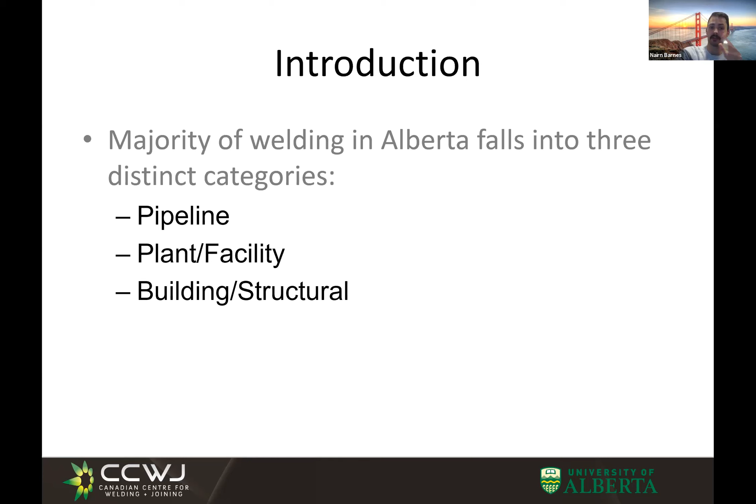And then finally, at the end, we have a work-through example where we're actually going to work through and build a welding procedure. I have a sample welding procedure to give to you guys at the end so you'll be able to see how we actually applied the code in order to build that.

So the technical definition of a standard is essentially technical definitions and guidelines that allow everybody involved in the project or the production facility to carry out their tasks, right? Whether it's welders, inspectors, operators, anything like that—that's what a standard details, all of those guidelines. Now, the difference between a standard and a code is wishy-washy.

This is one of the definitions, but essentially a code is a standard that has been adopted by a government body and is therefore enforceable by law. Most of the ones you'll see today are enforceable by law. If you're adopting that standard and having that certification, people can come after you and say, hey, were you following this properly? So that's pretty much the difference.

But the larger difference I want to highlight today is between standards and specifications. Specifications are something you will surely encounter, particularly in Alberta, if you end up working anywhere near the oil sands or touching it remotely—specifications are above and beyond standards. Essentially, they're made by companies or sometimes by overall industries, by private interest groups, where there are additional considerations above and beyond the level of the standard.

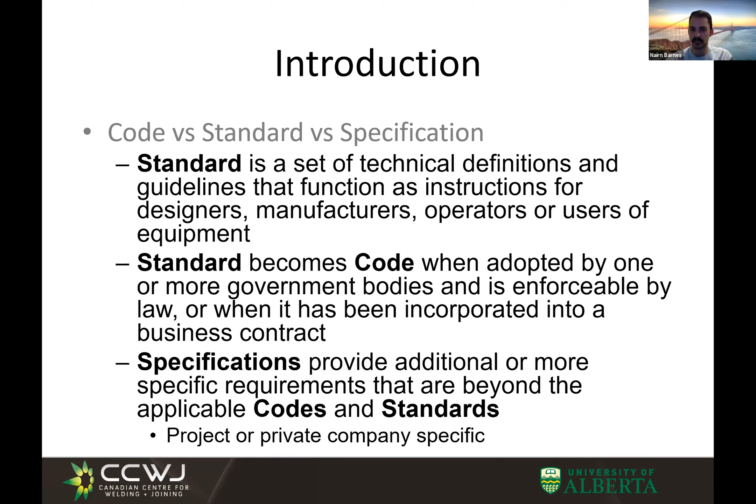All of these things serve to give clients a sense of accountability for their end user, for the person doing the fabrication. It's essentially a quality standard that they can hold you to. So if you are given a project with a specification and a standard listed for it, this is an agreed upon thing between both parties that says, this is exactly what you've agreed to do and how you've agreed to fabricate it. It holds you to a certain quality standard and ensures that you have the proper certifications in place to be qualified for that code in the first place.

Throughout all these different industries, there are different governing bodies you'll hear bandied about—governing bodies like ASME, or in Alberta, ABSA or CWB, AWS. All of these are different governing bodies, but they have a very wide range of involvement, and that range of involvement really changes the way you approach the application of those different codes. In certain codes, you'll have people that are overly involved, or at least that's the prevailing opinion. People complain about them and say, oh, all these bureaucrats are slowing everything down—we have to get this approval and this approval.

There's a good and bad side to all these situations. If you have all those governing bodies being really hands-on and involved in the process, yes it can slow things down, but it also provides that level of protection. When you're an engineer producing things to a code or standard and you don't have that governing body giving you that extra set of eyes confirming you've done things right, that onus is all on you. So there's a lot of liability and risk carried when governing bodies aren't very involved. It's something to consider as you move forward through your careers, a very real possibility.

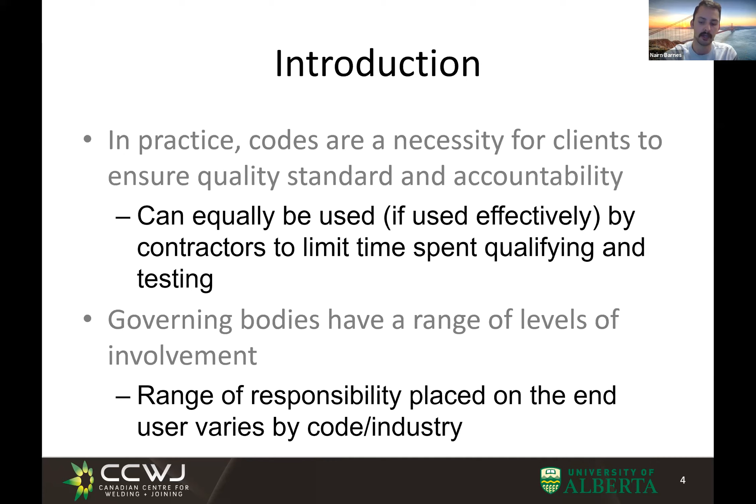Now we're going to break down some of the relevant codes for each of the different sectors, give them to you without going into too much detail, and then we'll start breaking down the individual sectors one by one. The first one is pipelines.

Z662 is the one you'll hear all the time in Alberta. I guarantee if you end up working in pipelines, you'll see every single specification that's ever been made thrown at you as well, but Z662 is your baseline. This is mandated across all of Canada. If you're going to build a pipeline that fits under their criteria, you have to follow that, and it's mandated by the National Energy Board. This was done during the Pipeline Act, and essentially they said this is a mandatory thing you must follow, you must carry this certification and meet the requirements of Z662.

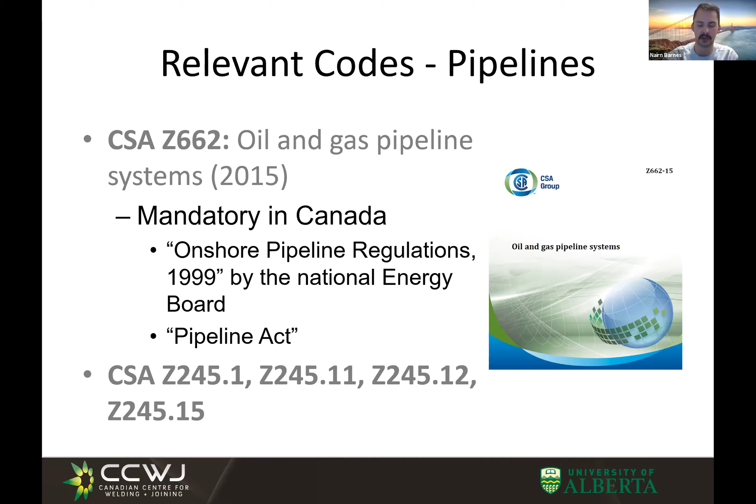That's all pipelines across the board in Canada. The ones listed at the bottom are additional ones you'll run into. The first one, I believe, covers seamless pipe, the next one is fittings, then flanges, and then valves - I'm not 100% sure on those, but that's what those codes correspond to. I'm not a pipeline engineer, but I believe that's right. Those give additional information about those specific areas and how you'd apply those things beyond the requirements of Z662, and you'll see that trend continue throughout the rest of the industries here.

When you go into plants and facilities, CSA B51 is the overarching one that provides the safety considerations behind it, but that's not the one you'll hear as much or as relevant when talking about plant and facility codes. Really, the ones you'll hear in Alberta are ASME Section 9, and I'm sure if you're having an ASME code expert talk, the next slide is going to look all too familiar after Thursday's lecture.

The other ones listed go above and beyond what the main ASME code says, like ASME B31.1 and B31.3, which are talked about quite a bit in terms of going more specific for pressure piping. A quick note: pressure piping and pipelines are not the same thing, even though pipelines do operate under pressure, otherwise they'd be very ineffective at their jobs. They're not the same as pressure piping, and those definitions are given within these codes.

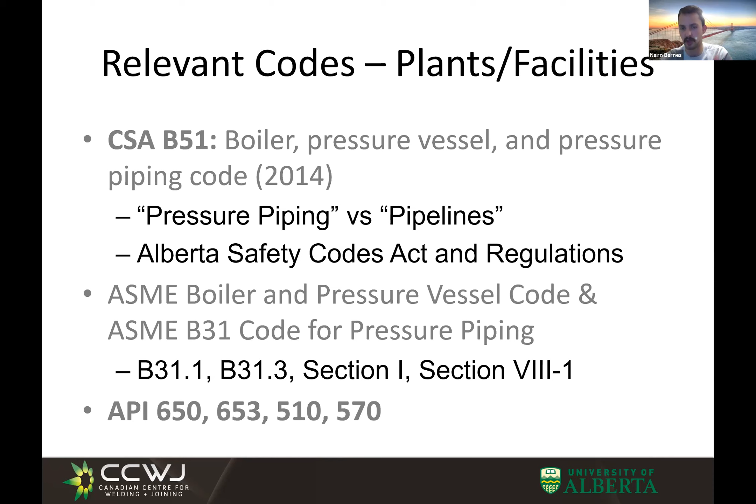At the bottom I've listed some API codes. API is the American Petroleum Institute, and those codes list - I believe the first is for pressure vessels, but the other three are for inspectors and inspection qualifications for pressure vessels. Those are relevant ones you'll probably hear when you go into industry. As for ASME codes, there are a lot of them out there. The one we'll focus on almost entirely when we talk about plants and facilities is ASME Section 9 - you'll hear that thrown around a lot within pressure vessel talk, as it covers all the welding considerations for pressure vessels.

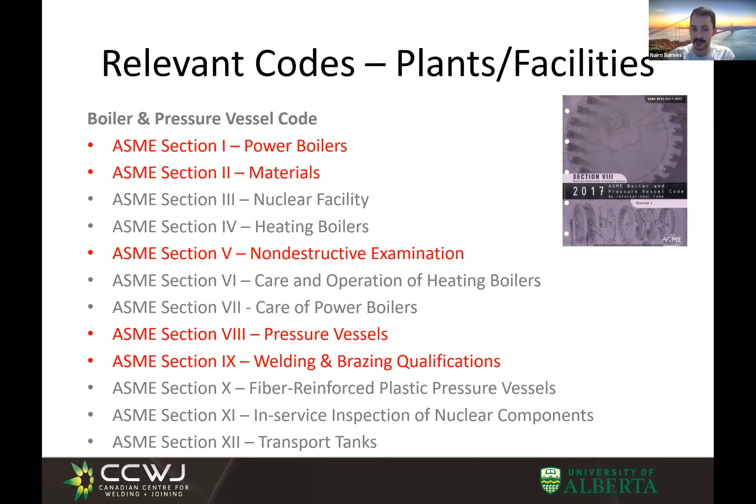So whether it be certification of welding personnel, or it's the actual qualification of your welding procedures, that's the one that's going to be relevant.

And then again, like I mentioned, you have B31.1 and B31.3 for power piping versus process piping. Those definitions are very clearly given on how those are distinguished between the two. I don't work in that industry, so I'm not ultra familiar with what the actual difference is, apologies for that.

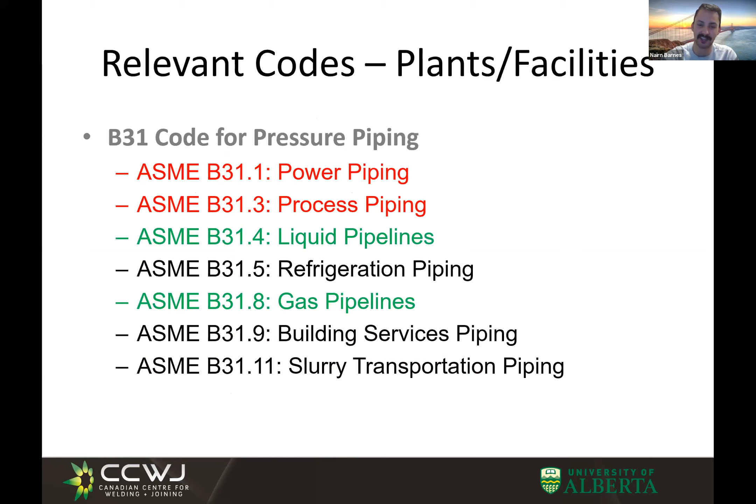And then finally, the one that I am very familiar with is the structural industry. Within Canada, we live in this nice little limbo state where, like all things, we end up with a Canadian version of things, and then we also have to abide by the American version of things as well.

But the ones you'll hear talked about, and we'll go into a lot more detail when we talk about structural specifically, are W47.1 and W59, which are both administered by the Canadian Welding Bureau, a term you'll hear a lot if you stay involved in welding. Those are both CSA, Canadian Standards Association codes.

And then the other ones relevant here are S16, which is design of steel structures. So if you're building a building anywhere in Canada, that has all the design and limit states you need to consider, much more in a structural engineering vein than a materials or welding side. And then there's the S6 code, which is the bridge code for bridge design.

Now, I mentioned that we also sometimes have to abide by the American code. So AWS D1.1 lives there. AWS D1.1 is essentially equivalent to W47.1 plus W59.

W47.1 covers the certification aspects of your company - how you get your welder certified, your welding engineer certified, your welding supervisors, your actual company certified. Whereas W59 covers the application. All of that is covered in one code in D1.1.

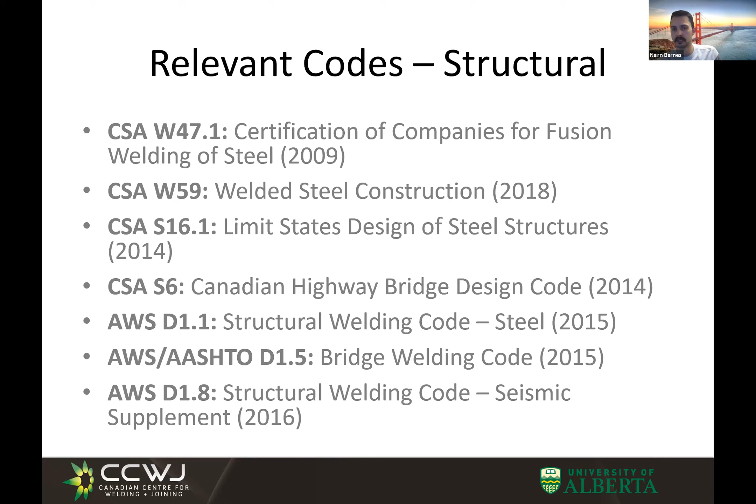Oh right, I have some definitions first. Good for me for knowing my presentation.

Weld procedure specifications - this is a term I'm going to throw out a lot within this presentation, shortened to WPS. Essentially, a WPS is your recipe book. So when you go to do a weld procedure, it has to be written down somewhere so that people know what to do.

That piece of paper, that recipe that has all the welding parameters, what process you're using, what base materials it's good for, what filler material you're using, everything like that is going to be written on a single sheet, or a couple sheets of paper. And that is your weld procedure. This is the recipe you can hand to the welder on the floor, and he can go and make that weld.

That definition is pretty true throughout all of the codes. There's some variation, unfortunately, because people love acronyms in engineering. WPS does mean the same thing for structural, but isn't actually called the same thing. So you might hear me slip in a D and say WPDS. That's because within the structural industry, we have welding procedure data sheets, which are that recipe. WPS actually means something different, just to be extra confusing. You'll see throughout this presentation that there's a lot of things with the exact same terminology that mean a completely different thing if you're in a different industry or referencing a different code.

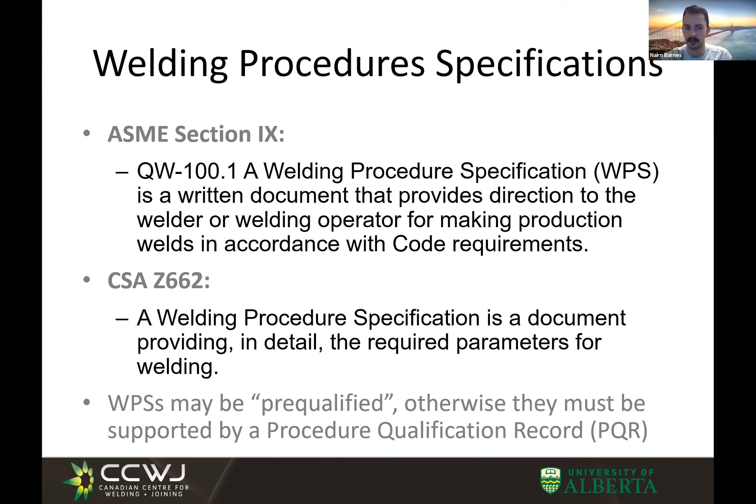If that doesn't apply, which it very often doesn't, particularly in Alberta, you need to support your welding procedure or certify it through what's called a procedure qualification record, or PQR. I know, more acronyms. A PQR essentially serves as the testing that proves out your welding procedure. The requirements of testing for a given welding procedure are also listed within the code, and we'll go through that within the example we'll run through today. Essentially, PQRs support non-pre-qualified welding procedures, which then can be passed along to the floor.

The next step in the process is determining the range of your weld procedure. You need to figure out what you want your welding procedure to do. Take the instance of building a pipeline: is it only going to be good for 36-inch pipe, or good for 36 and 24-inch pipe? Is it going to be an automated welding procedure? Is it going to be done with MIG? Is it going to be done with stick? All those different things need to be determined. You need to figure out exactly what you want your welding procedure to do.

This is a big consideration we'll talk about more as we go: do you want your welding procedure to be future-proofed? Do you want it built in such a way that you don't have to go back and requalify it a million times to get a bunch of different welding procedures? You want to hit what I'd like to call the Goldilocks zone, where you don't want a welding procedure so specific that in order to do a job you need 40 welding procedures, when 5 welding procedures with a sufficient range would do.

You also don't want to open up the welding procedure range so massively that if you hand it to a guy on the floor, he has so much freedom and flexibility that he doesn't really know what he's doing, and he's going to actually cause damage by not being given that specificity. So you have to balance both those factors.

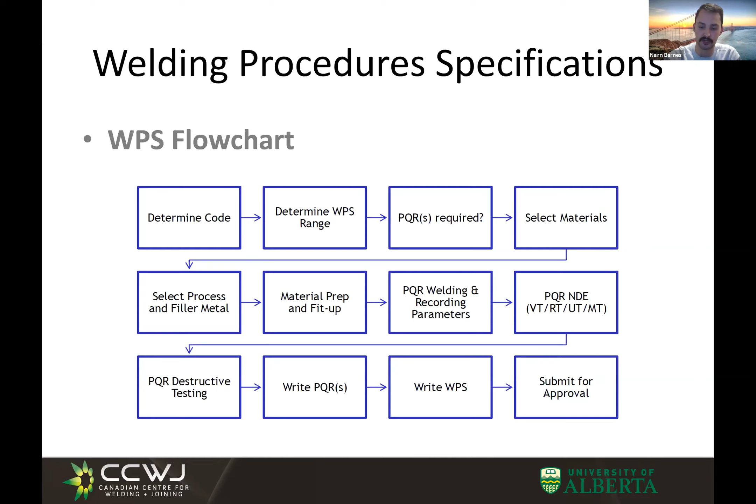All right, so first up, we're going to jump into pipeline welding procedures. And yes, that is a good note - I saw that in the chat. He or she is a very good note. Pardon my generalization there.

When we talk pipeline welding procedures, essentially that's covered off in Z662. Now, this is one of these instances where there is no pre-qualified welding procedures. For pipelines, you have to do a PQR every single time.

Now, granted, you can do a PQR and create a welding procedure that may be good for future projects, which is where we want to build that future proofing - but not always. Certain companies will just require you to build a PQR every single time you go to a new project. So you have to have that in the back of your mind - you're going into this knowing you're going to do testing.

Typically, these are not going to be reviewed by a governing body - in this case, the National Energy Board. They may audit it. If you're working for a huge pipeline, like when Enbridge builds pipelines, they're probably going to take a look and audit those welding procedures. Besides that, it's going to probably be reviewed by the contractor - that's your company - and by the owner, the client at the end of the day, be that a government client or a private client. It is going to be reviewed and subject to approval, but that means the onus really is being taken on by the engineer preparing that welding procedure throughout.

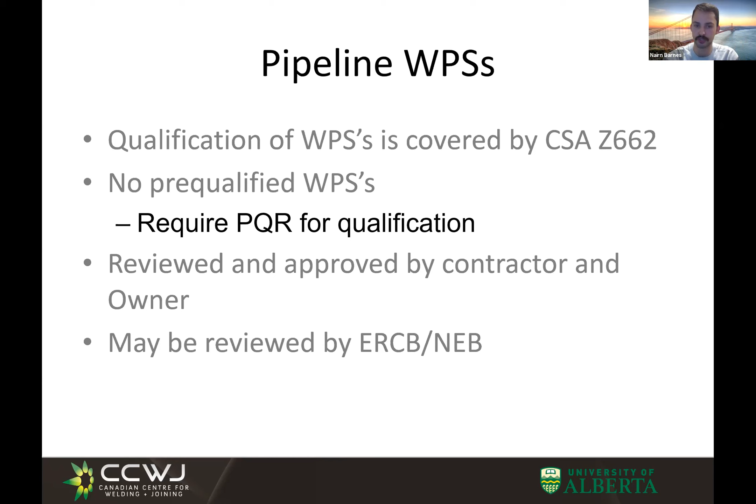So I'm going to chuck some of these things in here. Like I said, there's no need to memorize all these clauses - if you get into this industry, you're going to become more than familiar with these things. Materials for Z662 are shown in clause 5, specifically that table, and they cover the pipelines and all the components here. One of the things I wanted to highlight, one of these confusing things that has different definitions depending on the code, is notch toughness.

So notch toughness - we live in Alberta, and in the winter, particularly if you're welding or doing anything up north, the temperatures are very, very low. Typically the general temperature considered for active service is minus 45, and sometimes it goes as low as minus 60.

We're operating in a very cold weather climate, which means you need to make sure that whatever you're doing for welding is going to carry through and not fail when you put it into the field. I'm sure you guys, from what Patricia said, have gone through a bit of the NDE side and maybe testing, and if you're a materials engineer, you surely have heard of Charpy V-notch testing.

Maybe the MatEs too in MatE 202 - Charpy V-notch testing is essentially measuring the impact properties or the toughness of the steel. Unfortunately, notch toughness is the way we measure this throughout any welding code, but that notch toughness definition is completely different from one code to another. They're organized by categories, and you'll hear category language throughout the rest of the codes, but it doesn't necessarily apply because the categories are organized completely differently.

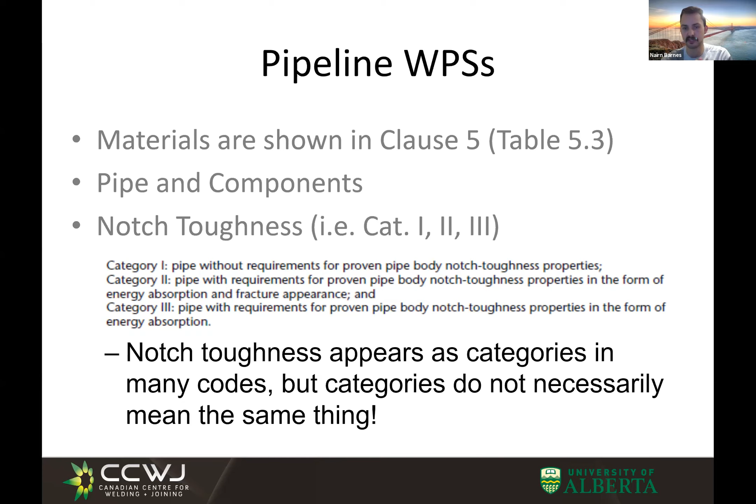Within the pipeline field, category 1 is something where you don't need to care about your impact properties. Category 2 is where you care about the impact properties, and not only that, when you do an impact test, you actually have to look at the fracture surfaces to see how that failure occurred - did it bust through and the crack propagated most of the way, or did the impact actually do most of the damage? They start to care about that in category 2. Category 3 is realistically what most of it will fall into if you're going to have notch toughness requirements, and they don't care about the fracture appearance - they care about how much energy it took to break that piece. But one thing to note about notch toughness and categories is it's completely different code to code.

In terms of the variables that go into building a welding procedure considered by Z662, they have that all contained in clause 7. This will be a very similar list of variables no matter what field you're in or what code you're referencing. So they're going to care about what welding process you've chosen, what the joint geometry is.

Is it a V? Is it a fillet weld? What does that joint geometry look like? They're going to care what the base material is, what you're using as a filler material, so fluxes would be counted into that for subarc. Shielding gas definitely matters, the position, direction of welding - is it vertical uphill or downhill, where direction really becomes relevant. It doesn't really become relevant in any other direction besides pipelines and vertical up, vertical down. Preheat and interpass they're going to care about, and then post-weld heat treat as well.

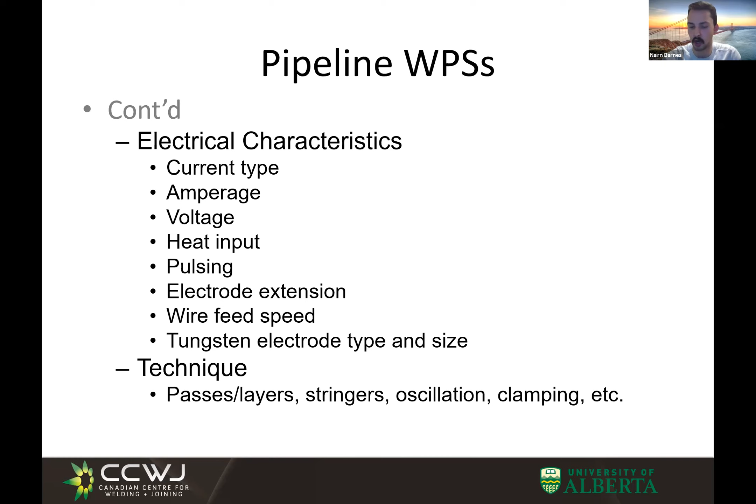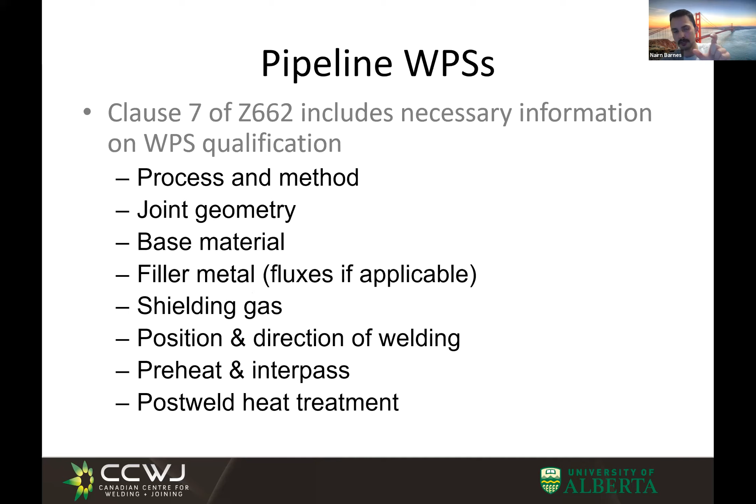Then the main welding parameters that you guys will have learned throughout the class - amperage, voltage, travel speed, stick out, all those different things will be included as well in terms of variables to be considered. And then there's also the technique - are you welding in a stringer bead? Stringer bead is just a single bead, you're not doing anything fancy, you're just running it straight across. Or are you putting in a weave, trying to build a bigger thing? How much is your layer size varying? All those things are considered in that technique. That's just a blast of all the different variables that go into building welding procedures. It's specific here to pipelines, but these same lists apply to all of the different industries.

Another term you're going to hear throughout all the codes is essential variables. For essential variables, what this means is all of these variables here - certain ones considered within there are considered essential, which means that if you change those variables outside of the given limits - and all the codes will state, and we'll see here in a second what those essential variables are - if you change your parameters, or want to change the parameters in your welding procedure outside of those given limits, you are going to have to perform a new PQR.

So what that essentially entails is you want to be very careful. When we're doing that sort of future-proofing and planning of our welding procedure and determining the range, the essential variables are really what you want to consider, because that's what's going to affect whether or not you need to do a new PQR. So if you change your amperage by 10 amps at the bottom end, nobody's probably going to care.

And it probably won't be listed on the essential variables. I mean, it could be for given codes, but it probably will not matter. But if you want to, instead of welding on 350W steel, you want to now weld on stainless steel, people are going to care. And they're going to require you to do a new PQR. So you want to future-proof it as best you can.

And certain times you can't get away from it. If you're changing base materials entirely, you're not going to build a weld procedure that's good for two completely different families of base material. But to the best of your ability, you should be planning with those essential variables.

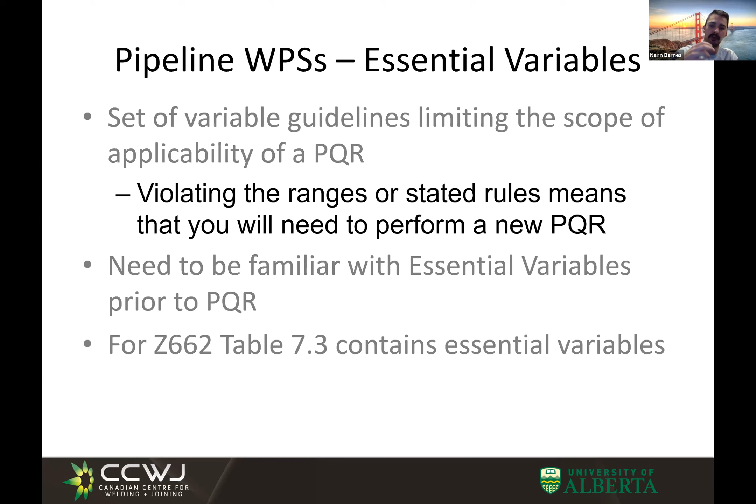So I've essentially straight copy pasted out of Z662 the table 7.3 that lists all of the essential variables. I'm not going to go through this at all. I'm just going to show it to you and have it as an example here. The essential variables are going to look different for all the different codes. But basically, the big takeaway I want to give here is that it's clearly defined what variables and parameters are subject to these limitations, and you need to become familiar with them.

So in the pipeline code, it's organized by the diameter, outer diameter of the pipe, as well as if you're using automated welding or not. Pardon me, I'm just going to take a drink.

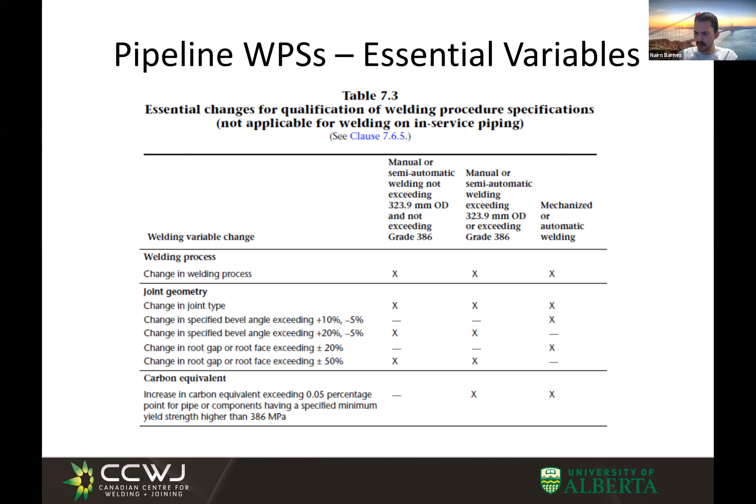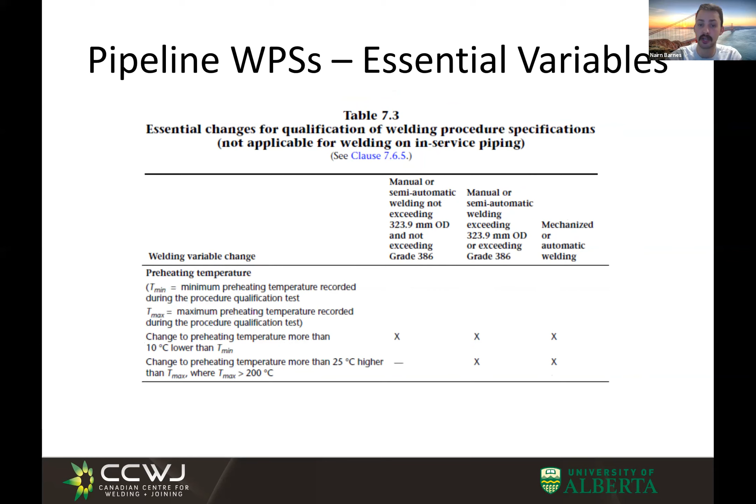And then the actual variable is shown on the left-hand side here. So I've put, like I said, the entire table in here. I'm not going to go through it. You can look through it on your own time if you're interested. But I just want to give you that framework or example to base that off of.

So the next thing I wanted to highlight out of this code is the PQR testing. One of the interesting things about pipelines is that the welding procedures are always subject to these PQRs, so you always have to do testing. Now, the nice thing is it's very clearly defined what kind of testing you have to do.

So what they have is, given the size of your pipe, they will tell you which tests you need to do. So all the tests are listed here, and then they'll tell you how many of those tests you need to do for each one. So for smaller pipes, you don't need to do as many structural tests, but the larger you get, the more they're going to expect that baseline standard to be there.

So not only are they going to tell you what tests you need to do, they're also going to tell you where you need to extract those samples from. So given your different size of pipe shown here, they're going to tell you exactly where to extract all of these different types of samples.

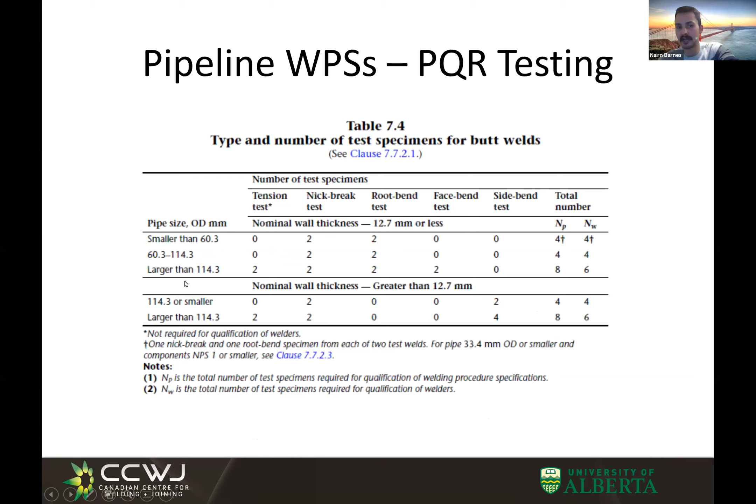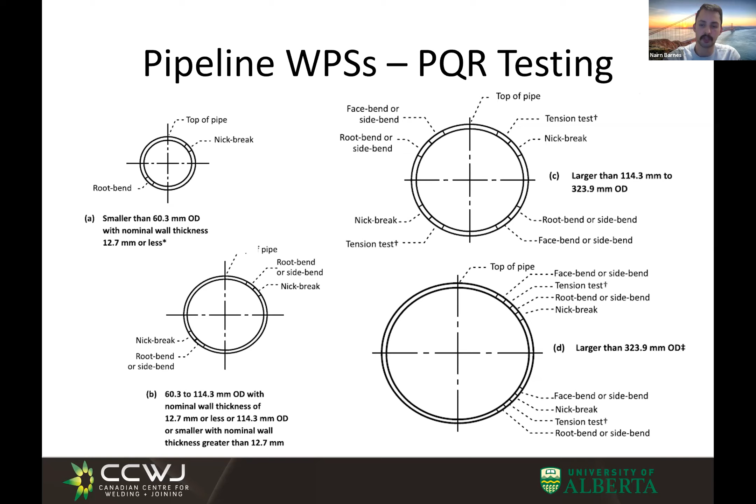So if you're doing this small size of pipe, this less than 60 mil outer diameter, you're going to have to extract nick break and root bend samples from these exact locations within your sample. So you need to have everything very well documented and prove to a client at the end of the day that you extracted those samples from where you said you were going to. So all of that is clearly defined in the code, but it shows you exactly what you need to do.

The types of tests themselves, I'm sure you guys will have seen some of these before. Tension testing is one of them that's listed. Tensile testing is exactly what you've seen and heard of, especially if I think all of you will have gone through MatE 202. If you haven't, feel free to flag me down and ask a question about it specifically.

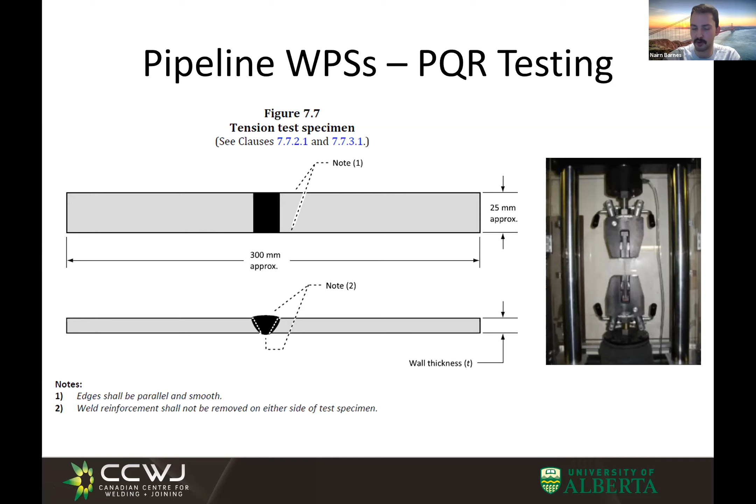But for tension testing, essentially, you're going to do your weld. Your weld should be situated for Z662 right in the middle of your plate. And then you're going to put it within the sample dimensions. You're going to put it into a tensile testing machine and pull it. Essentially, they care not only about the number, but they also want to look at that fracture surface and see where it failed. They're looking for failures within the heat affected zone, different places where that weld could have failed. And it can reveal a lot about the integrity of a weld based on where it failed. So tension testing is one that was mentioned.

Nick break testing is a very specific test to pipelines. You don't really see it too many other places. Essentially you prepare your sample, which is a rectangular prism with a weld in the middle of it, and then you're going to notch it on both sides.

You machine it down and notch it. These can be cut by a hacksaw, though there are other methods of cutting it. Then essentially you fracture it by applying a load, probably with a press. It doesn't have to be, but that's the easiest way to do this.

Really, what they care about for a nick break test is examining what that fracture surface looks like. Did the failure happen more to one side than the other? How much of that weld material is left over? Did it break somewhere else that wasn't in the weld? All of those things start to matter, and all of those parameters and acceptance criteria are clearly listed within the code.

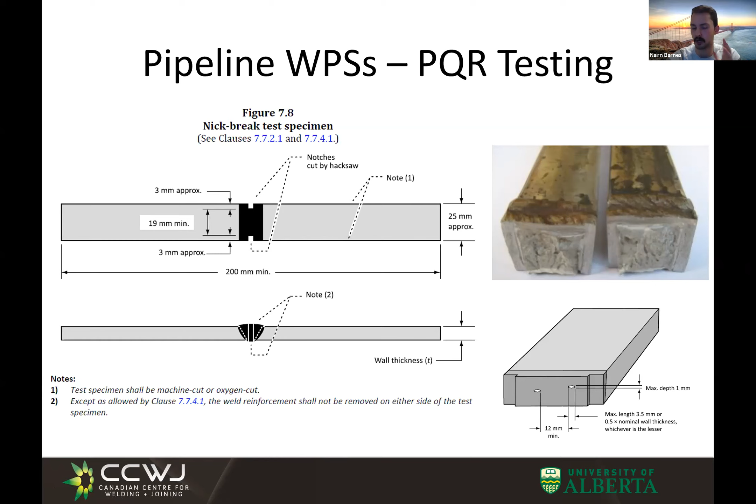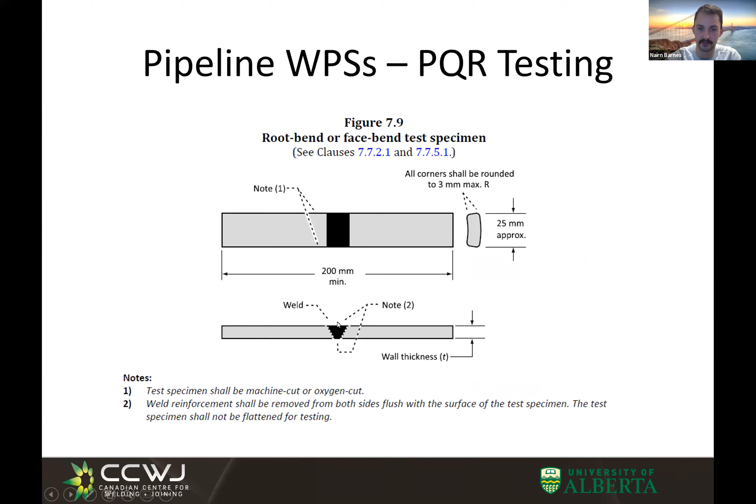What they want to see out of this is a couple of things. First, did that weld have the strength and ductility to allow the bend? Did it bend, or did it just break? If it breaks, you're going to fail the test.

But there's acceptance criteria. Very often within these tests, you'll see small micro cracks develop, especially in the heat affected zone or at the weld's root. Some of those cracks could be acceptable, and the acceptance criteria is all listed within the code, but some of them are going to be unacceptable. Or if you bend it and porosity starts to show up that you didn't see when the sample was just cut, all those things are what they're looking for to give it a pass-fail criteria.

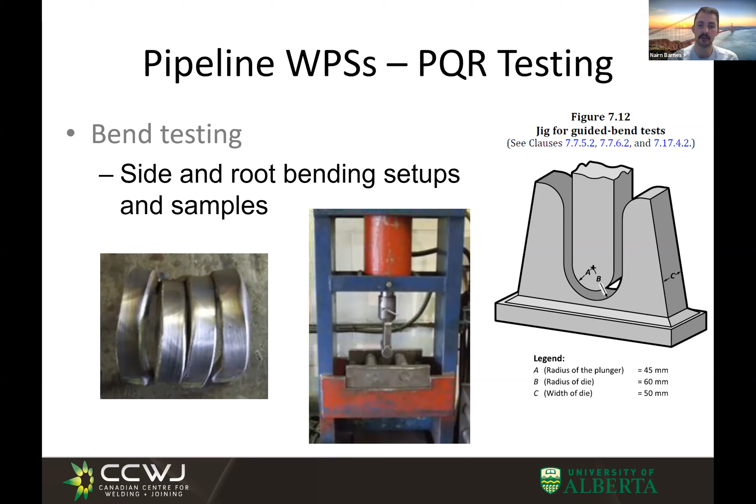You'll see these tests like side and root bends throughout all the codes. Like I said, nick break is a little bit specific to pipeline, but you'll see these types of tests throughout all of the different codes.

So that's kind of your drive-by view of pipeline weld procedures. I know it's quick, but that's the main highlights I wanted to pull. Of course, there's lessons to be learned throughout all of them, and there's commonalities to be learned throughout all of them. Hopefully, if you have any questions, just chuck them in the chat and I'll try to answer them as best I can. But really, this is going to be very drive-by.

Plant and facility welding procedures - like I said, you're going to get much more information about this, so I'm not going to go into too much detail in this area. Mainly what we're going to focus on is ASME Section 9. ASME Section 9 covers the qualification for all the welding procedures, welders themselves and the operators, and all those different aspects of it. Then there's sometimes additional requirements that creep in from these other ASME codes.

In this particular industry, there are pre-qualified welding procedures, but from my experience and interacting with people within the field, it's really not a reality that you can apply pre-qualified welding procedures. For the most part, you're looking at doing PQRs.

This is one of these very unique things in Alberta, where there's one of these governing bodies that gets a lot of flack. When you go to submit these welding procedures, you not only have to get the approval from the owner or the client, but you also need to get it from ABSA - this is the Alberta Boilers Safety Association.

Essentially, their job as a governing body is to ensure that you are adhering to the code very strictly. There's good and bad aspects to this relationship, but ABSA in particular is very well known for being very hands-on and very involved in the process.

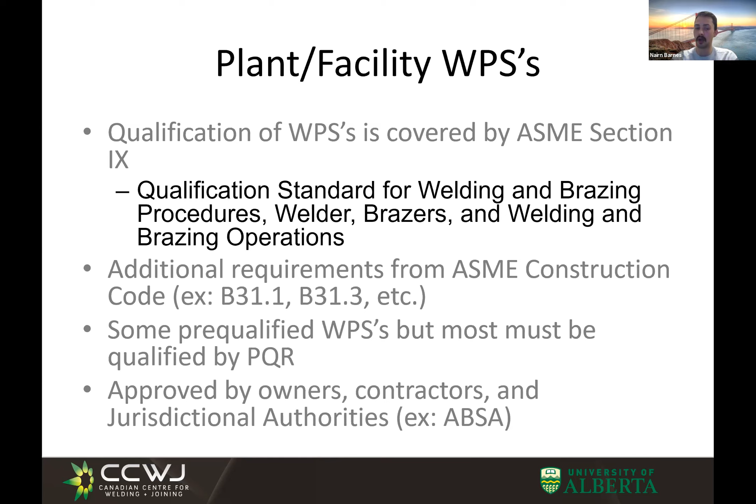But yeah, if you work within this field, you'll definitely hear about ABSA.

The part in particular of ASME Section 9 that we're going to look at is QW, or welding. There are 5 articles within it, so 5 different sections. You'll see that the ASME code, if you ever flip through it for casual reading - I'm guessing not, but if you end up working in the field - is written a little differently than some of the other codes. It's very self-referential.

As you go through the code, you'll see a lot of 'okay, see this clause, now see this clause.' It's one of those codes where you do a lot of bouncing around, and that's true of all codes in general, but ASME Section 9 in particular is very sticky about those types of things.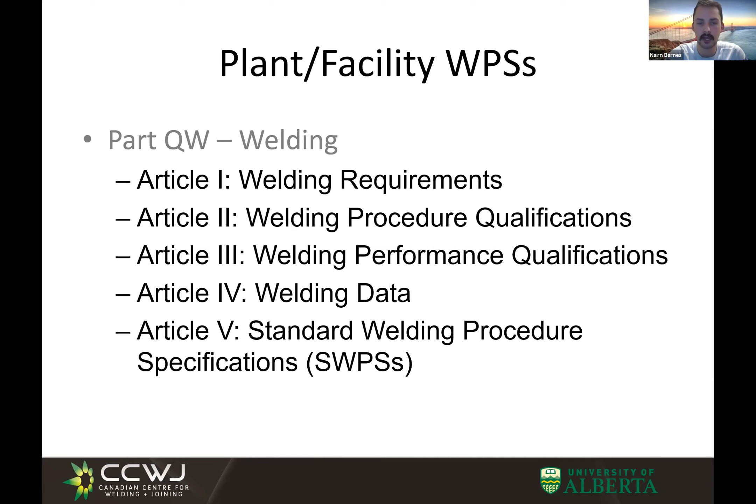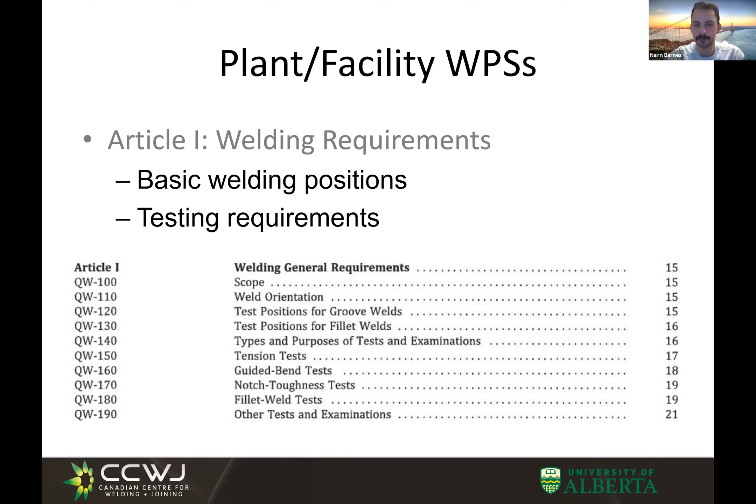So we have the 5 different articles here we're going to run through. The first one is the welding requirements, more general requirements. It's going to give you information about the basic welding positions, some basic testing requirements, nothing too insane. This is just your general introduction within Article 1.

Article 2 is where we get into actual weld procedure qualification. In this section, they list all of your essential variables, something they call supplementary essential variables - which we'll get into, another confusing thing - and then non-essential variables, which is anything that doesn't fall into those first 2 categories. One of the other things unique to this code is they talk about tempered bead welding.

Essentially using the current pass to affect the metallurgical constitution of previous passes. So you can affect the properties of the previous passes by welding over it again and subjecting it to another heat cycle. Typically it's done to give hard phases a little more ductility or provide a different level of toughness. It's very well explained, but it's pretty much one of the only codes that actually talks about temper bead welding.

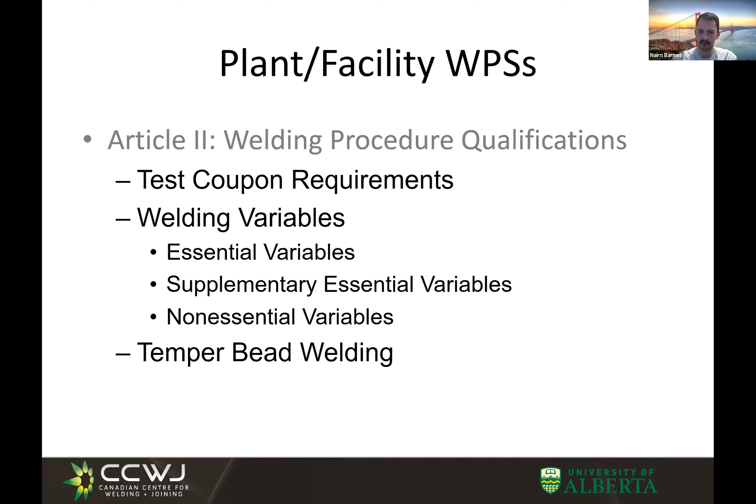In other codes, it's maybe referred to, but there's no explanation given towards it. So essential variables here are much the same as what we saw in the pipeline code. They're very clearly listed, but they have this new term they throw in called supplementary essential variables. Essentially the only supplementary essential variable is this notch toughness requirement.

So for low temperature, they require you to have a CVN, a sharp V-notch test that's passed? I don't know why they call it supplementary essential variables and not just notch toughness requirement. Seems confusing to me, or they could just include it within the essential variables, but it's all in there. And then they also list the non-essential variables as well.

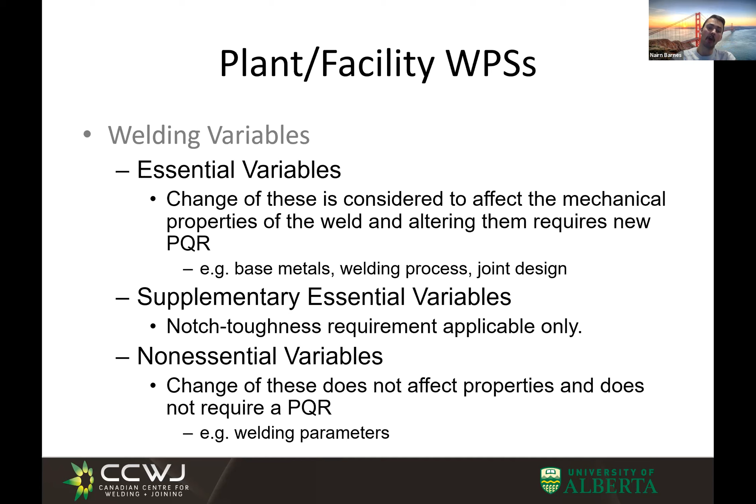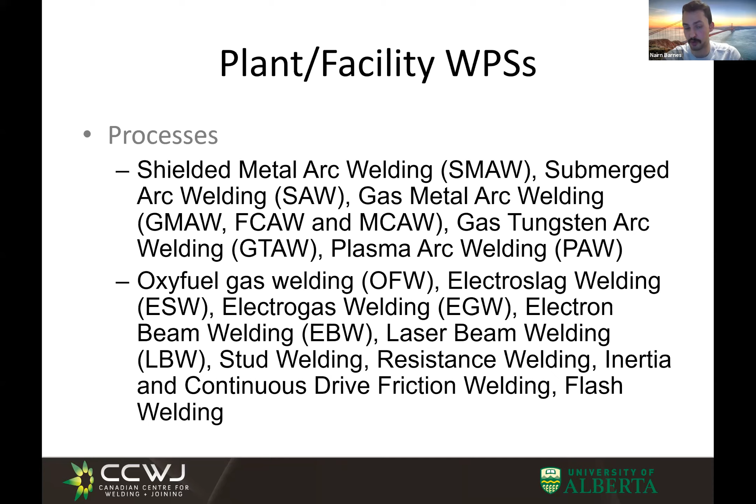In that section as well - and this highlights one of the interesting things about ASME Section 9 - is they list all the applicable welding processes, and if you look at this list, you'd be hard pressed to find a welding process that isn't listed here. There's a couple missing, but it's pretty all inclusive. The reason they do that is to cover all their bases, to make sure nobody can surprise them as they go through. There's good coverage of pretty much any single welding process, where other codes are not this widespread.

Welding performance qualifications are within there. This has the information regarding welder and welding operator qualification, tells you essentially what kind of testing is required to get them their initial qualification, how often they need to do retests, how long is their certification good for. All those aspects will be covered within that, as well as the coupons.

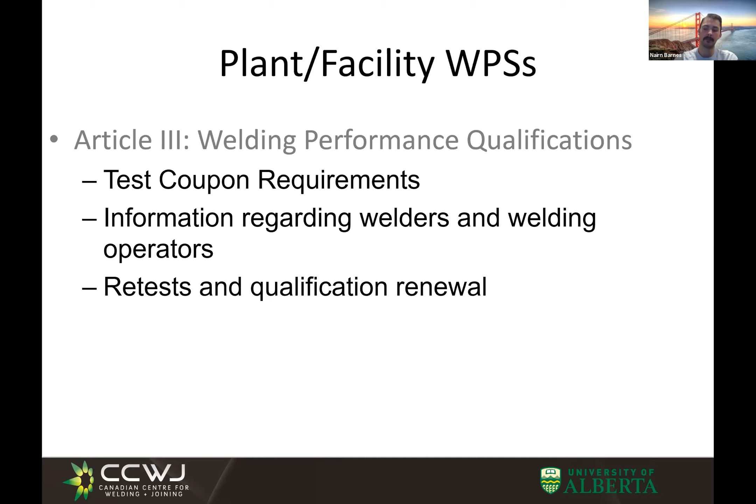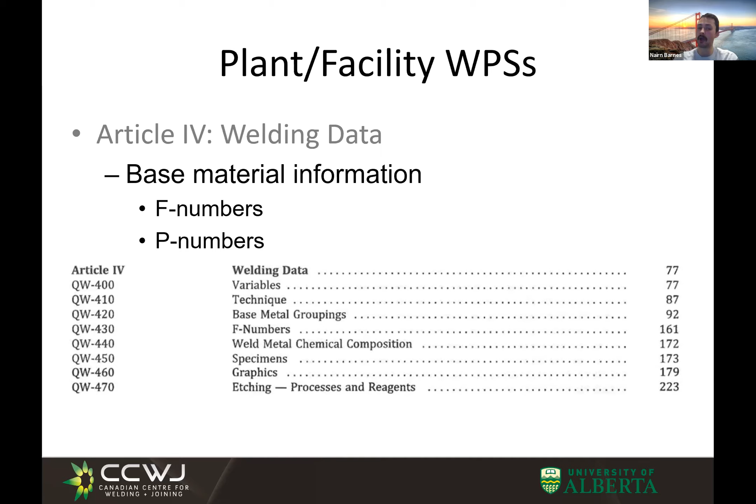Then next one up is welding data, and this is one of the important ones. This contains information about base material as well as filler material. And you'll hear these two things thrown out, F numbers and P numbers.

I've included links to them here where they have websites that are just the F and P numbers. P numbers are essentially all of the base materials that you can use within ASME Section 9 given a P number. So whether it's ferrous steels or nickel containing steels or manganese containing steels, whatever it is, that's going to have a separate P number. That's all listed on that website.

It's what was the base material chosen for the test, and what does that mean it's good for. So you want to be smart about this. You want to choose a base material that at the end of the day will allow you to build in the most flexibility moving forward. You want a base material that's going to give you the largest range, or maybe not the largest range, but the most useful range to you.

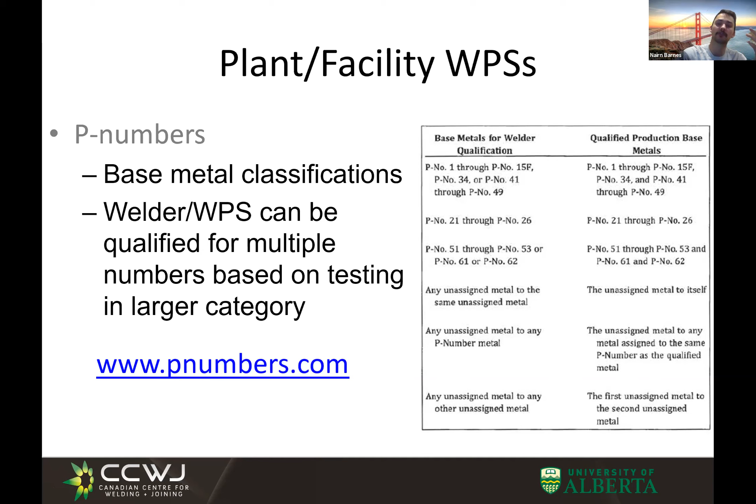F numbers are much the same, but they are for electrodes, so for your actual consumables here. And welders can be qualified to multiple categories, but again, same type of thing. You need to be smart about what you're selecting as the initial test so that you can build in that future proofing.

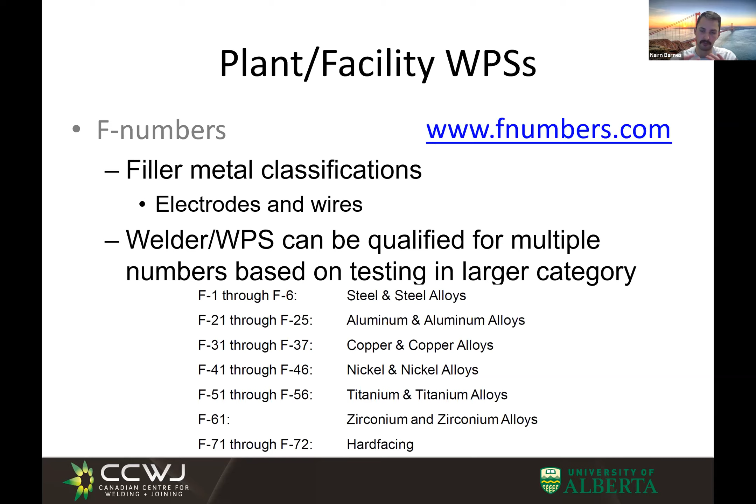That's why F and P numbers are something good to become familiar with if you're working within those fields. I am not personally familiar with these, but if you're working within these fields, they're very useful because they give you that ability to plan and to have that future proofing built in as you go through qualifying welders and welding procedures.

The last one here that is of relevance out of ASME Section 9 is Article 5, standard weld procedures. This is not at all common in Alberta. No notch toughness applicability, so no low temperature. Good luck building a pressure vessel that isn't going to be subject to something with low temperature requirements.

The ironic thing is even though they call these standard welding procedures, they still need testing and test coupons. So I'm not really sure what the purpose of these are in Alberta. It's very interesting to list them all in there and to have that option available, but it sounds like it's not the most useful option.

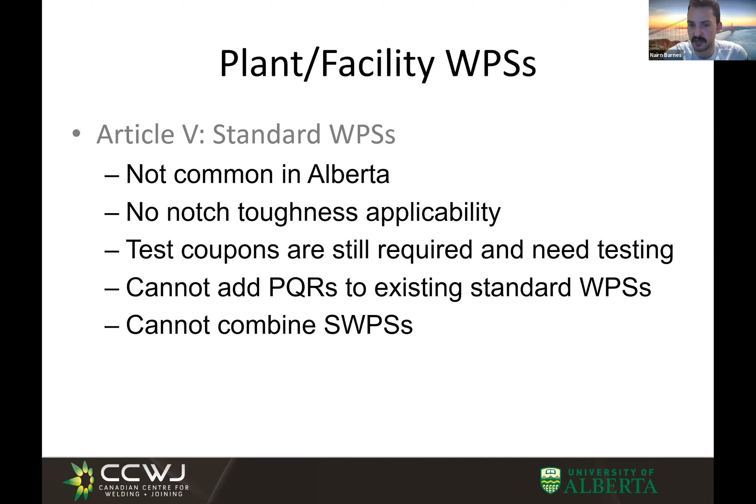Maybe you'll get into a field or work in a company that will use them. So I just want to make it available to you that they are there, but I can't actually speak to them being very widely used whatsoever. So that was our plant and facility look.

Yeah, that's a good point, Eddie. Yeah.

Exactly that, which is trying to reduce the number of weld procedures, which is that future proofing, right? You don't want to have a bunch of welding procedures that are going to cost you a bunch of time and money or confusion.

If this is a little anecdotal, but when I first joined my company, through acquisition and different things, they had gotten a bunch of welding procedures from all of their acquisitions throughout the years. When I joined, we were looking at over 2,000 welding procedures, which is useless. It's a completely extraordinary and exorbitant number, and it's completely useless.

So you want to, at best, be working with a limited number of welding procedures so that, one, you can make sure that the appropriate one is given to the people on the floor, but also that the data within them is useful as well.

So, okay, now we're going to go to structural welding procedures. This is my bread and butter. So if you have questions here, I should hopefully be able to answer them. Otherwise, maybe I'm not so good at my job.

We'll start off, again, we're focusing on the Canadian market. We'll talk a little bit at the very end about the American codes, but we're only going to mention that once we've gone through the actual working example, or case study, I guess.

The first thing I mentioned was W47.1. W47.1 is sort of your certification code. It covers the certification of welders, welding operators, welding supervisors—the people who oversee the welders while they're welding. It covers the certification of the companies themselves, so companies need to be certified through this code, and welding engineers need to be certified to this code. I had to write tests to be able to attain my certification here.

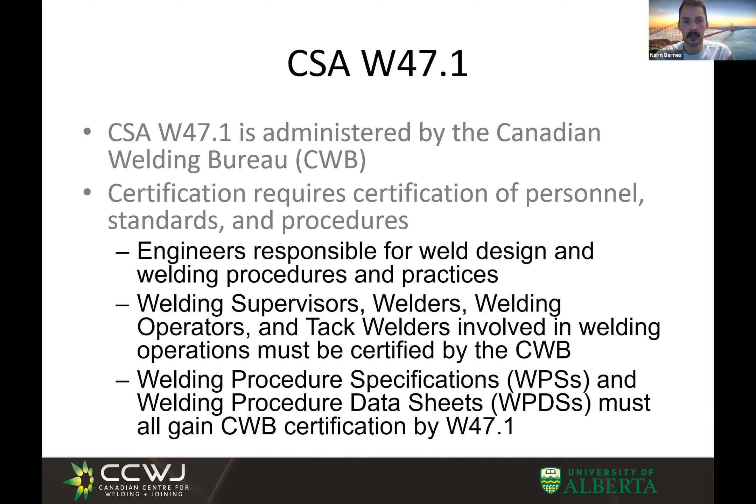Within W47.1, there are 3 distinct divisions or levels of certification. The lowest on the totem pole is Division 3 companies. Division 3 companies do not have any requirement to employ or retain a welding engineer. This means that if they have welding procedures, they are using the cookie cutter, pre-qualified welding procedures, and submitting them to the CWB to get approval. The CWB will actually provide a CWB stamp on welding procedures that they're approving. Division 3 companies are typically very, very small, doing small work like handrail or something like that—pretty small companies, not doing any large type of project.

Division 2 companies—in a previous lifetime, I worked for a Division 2 company briefly—retain a welding engineer on a part-time basis. So they don't employ a welding engineer like myself full-time; they purely retain them and bring them in to write their welding procedures and perform audits on their welding operations to ensure that they meet the certification requirement. Essentially, it's a good methodology of getting these mid-sized companies a welding engineer and a level of certification with W47.1 without the expense of a full-time welding engineer.

Division 1 are companies like Supreme Steel, where you have to employ a welding engineer on a full-time basis in order to have that certification. The real reason people go after Division 1 certification is to be able to seek out large work. A company like mine has been responsible for a number of very large construction projects—the Anthony Henday bridges, a lot of skyscrapers in Seattle, the Amazon spheres, Bow Tower in Calgary, all the Calgary bridge ring roads—all those types of things we've fabricated. The only reason we're able to even qualify for those jobs is because we're a Division 1 company.

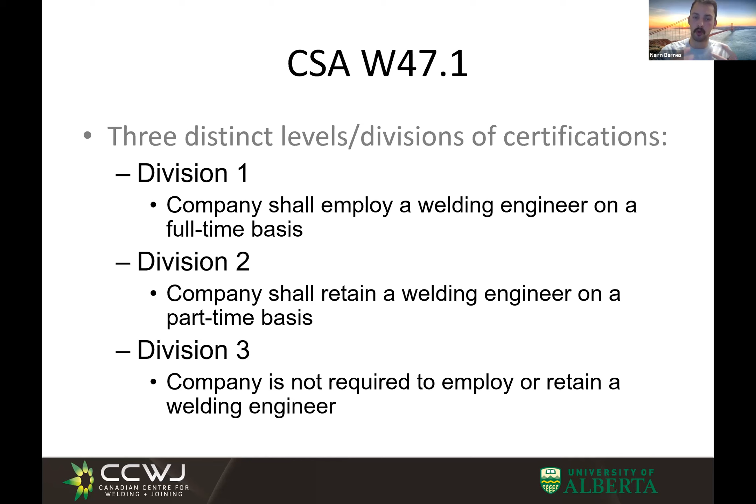Welding procedure specifications—this is where we get into the weird thing where the structural industry decided they needed to be special. Welding procedure specifications do not mean the same thing here. Welding procedures in all the other codes were called WPSs. In the Canadian structural industry, WPSs actually refer to overall guidelines for specific processes. Our company has a WPS for each one of the welding processes: stick, GMA, metal core, flux core, subarc. We have all these WPSs for those. Essentially it's a general guideline or general procedure—if you're going to apply that process, that's where you're going to go to look at it.

The unfortunate truth is I've written up this welding procedure specification for all the welding processes we use as a company. The document, with all the welding processes, is like a 90-page document including all the required information, and it's approved. I may be the only individual in my company who's ever read it. Welding procedure specifications are designed to be a reference point if welders are looking for help or want specificity on a process.

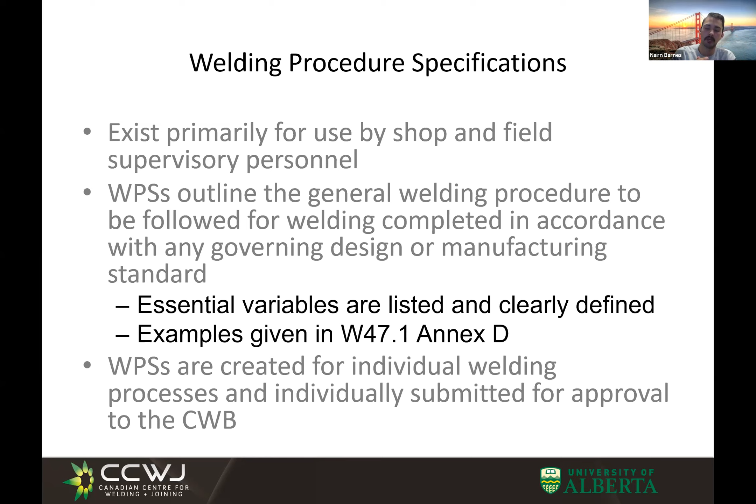But the reality is nobody actually uses them in practice. They are completely a certification requirement. What people care about is that welding recipe. In the Canadian Welding Code for structural, it's referred to as a WPDS, or welding procedure data sheet. That's your actual recipe that contains all the useful information you could hand to a welder so they could actually go and weld it. The welding procedure specification will not give them that ability - it's essentially just a general list. The idea is that the welding procedure data sheet will fit within the general range created by the WPS. But again, reality is nobody looks at WPS, which is sad because I put a lot of work into mine, but I don't think anybody's ever read it.

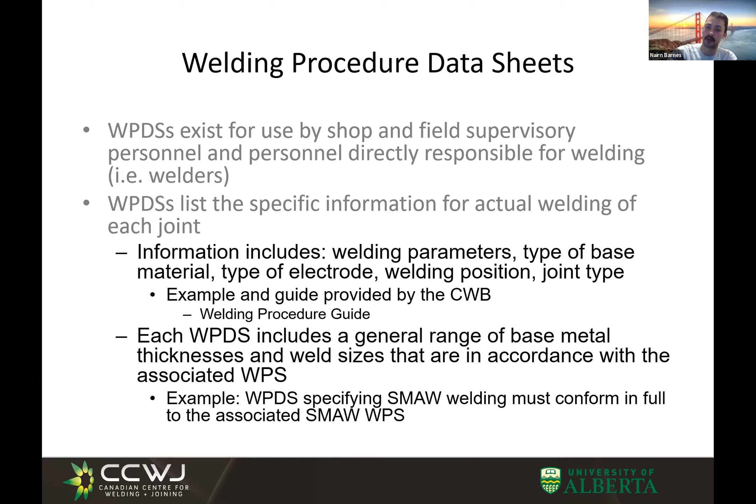Then you get into the next step, which is that they distinguish between the certification code and the actual application code. W47.1 is your certification code administered by the CWB - that's all about getting people qualified and getting companies qualified. W59 is the actual application - it covers workmanship, actual welding procedure development, all of those things. Neither code is useful without the other one. Essentially, they're completely based on one another - one is certification, one is implementation.

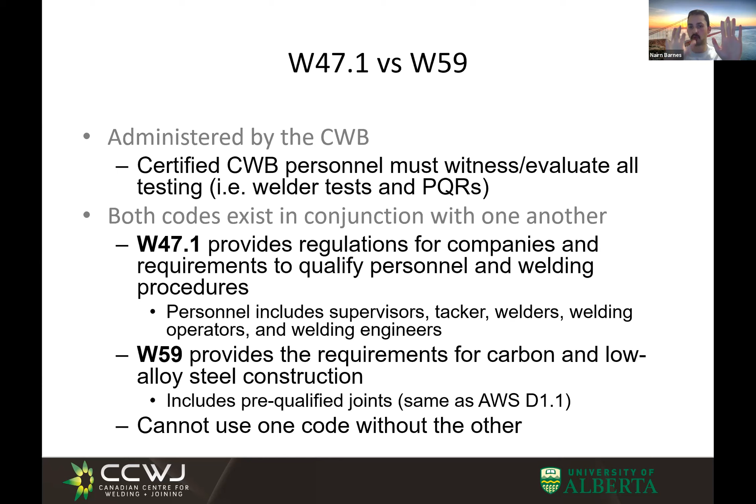One of the things I wanted to highlight: in W59, all the welding symbols listed conform to the AWS A2.4, a standard of the American Welding Society that covers welding symbols, meaning that between Canada and the United States you have uniformity in how we treat welding symbols. So all the definitions, with a couple exceptions, are the same, meaning you can work within both countries and not have an issue.

When you go into other countries - very often we have projects where a European designer has created the drawings and it comes to us, and we get the welding symbols in the European format - those, when people first look at them, might as well be written in hieroglyphics because they're completely different, and everything means completely different things.

A good example is fillet welds. In Canada and the US, we define the fillet weld size as the actual leg size. So if you have a corner joint and you're putting a fillet weld across, we're talking about the actual leg size when we talk about the size of a fillet weld. But in Europe, they talk about it as the throat size - from this theoretical point where your weld reinforcement is at its highest point, down to the root, is what the Europeans are referring to. It creates a lot of confusion.

So being familiar with the welding symbols - the good news is if you're working within Canada and US, it's all uniform. If you work within Europe, it's completely different. In South America, I believe it sometimes works within the European codes, so you get a lot of variability there.

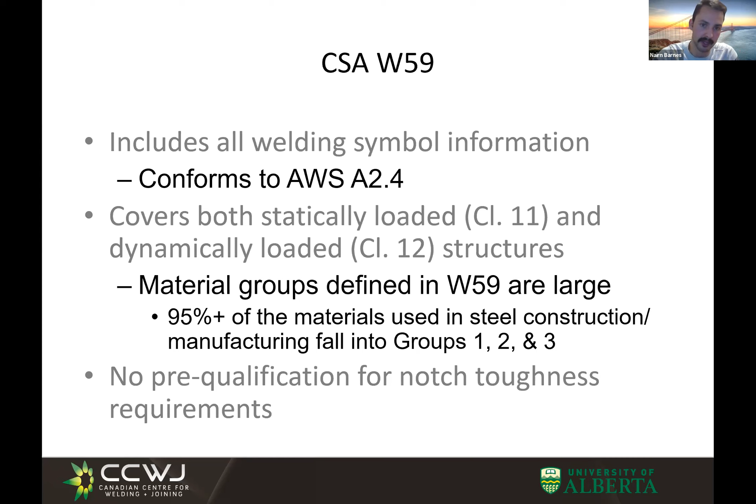Welding symbols, I'm not going to go into detail. I'm trusting you guys have seen enough of that through Patricio, but just know that's all listed within these codes as well, and it's required by the code to list all of that in the drawings. Everybody from the welders up should be familiar with reading them. Sometimes there's a bit of variability, but everybody should be familiar with how to read welding symbols and distinguish the different types.

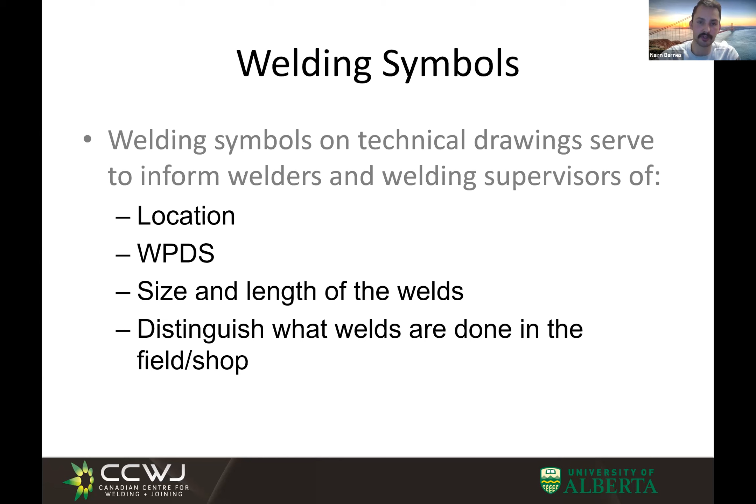Based on what you choose to qualify your procedure with, you can get a certain range of qualifications. So let's say I want to do a fillet weld and I want to be able to do it in the flat position as well as the overhead position. Well, I don't need to do a test for flat and for overhead - I only need to do the test for overhead. Based on that overhead test, they're trusting that if I can do an overhead weld and pass it, I can also do a flat position weld.

This same idea applies to welder qualifications as well as weld procedure qualifications. So again, it's building in that thought process - when you design a procedure, you want to be as smart as you can and prevent yourself from having future work, future welding procedures, or overloading yourself with welding procedures. Try to be as smart as you can when designing that.

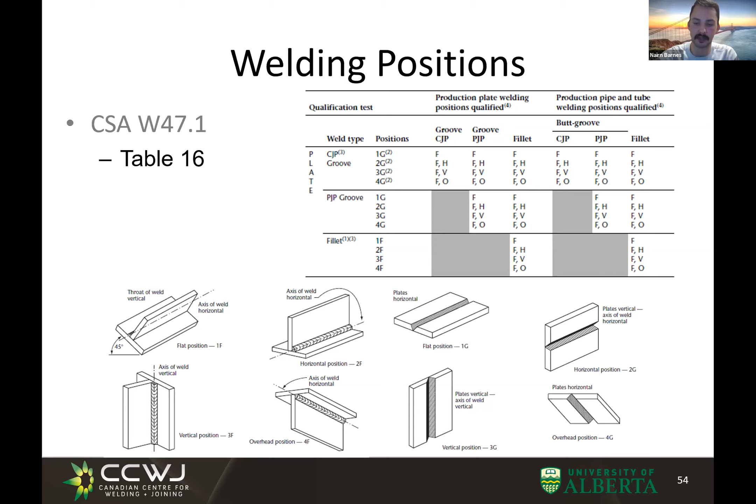So, last thing here - how are we doing for time? Okay, we're not doing too bad.

I wanted to focus on a case study here, something I'm very familiar with - a bridge girder. I wanted to give you guys a baseline scenario of how we would actually build a welding procedure. At the end of the day, so long as nothing goes wrong with this Zoom, I'll show you the welding procedure currently in use at our company. I've taken out some of the more pertinent information, but the weld procedure currently in use within our company for fabrication of these bridge girders, and the process we went through to qualify the procedure.

Essentially what we're looking at today is how we would qualify this fillet weld. When we build bridges and bridge girders a lot at my company, when you're fixing these flanges to the webs, they're essentially affixed with four welds, one in each corner, and these are all fillet welds. Now these girders - you saw in the picture, this is a girder line - are actually made up of a couple different girder segments all spliced together.

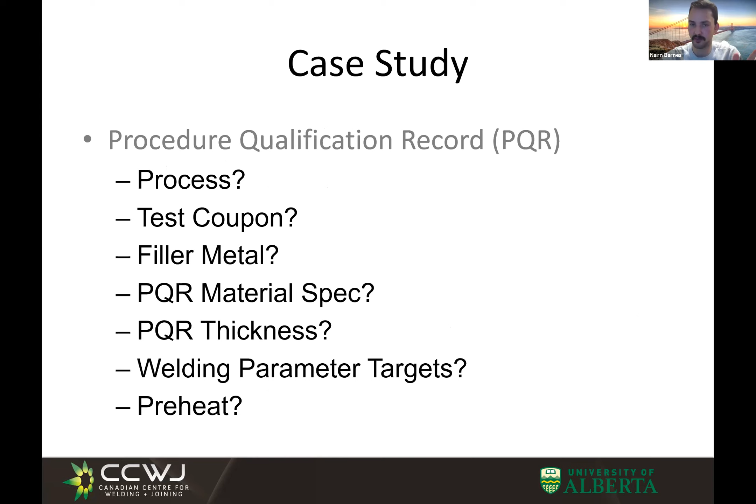So we start building - we know we have to do low temperature, so we can't use pre-qualified welding procedures. We've already crossed that off the list. So now, when we're looking to build our procedure qualification, or PQR, we're going to look at what process we want to use. When building these procedures, we want to be as efficient as we can.

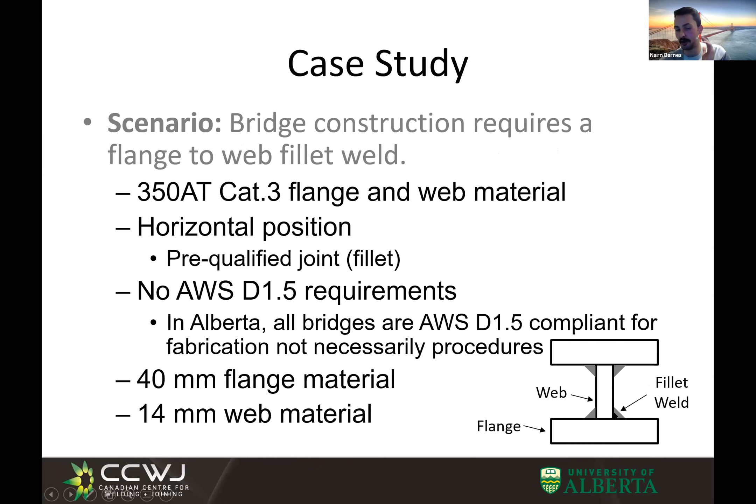In this case we're going to select sub-arc welding, because sub-arc welding can be run by a machine and automated. You can literally stick a tractor into this joint and run it the entire length of the girder in one shot. And because sub-arc is such a large heat input and high deposition process, you're able to deposit your required weld in one pass.

One of the interesting things considered by the Canadian Welding Code is that because sub-arc is this type of process, you get an extra 2 millimeters. The typical weld size allowable in one pass for a fillet weld under most codes is 8 millimeters - independent of the actual process, that's the maximum weld size you can guarantee with one pass, beyond which you're not allowed to do a single pass larger. But for sub-arc there's an exception, because it has this nice deep penetration characteristic from the high heat input and high amperage, you get to consider an extra 2 millimeters of penetration.

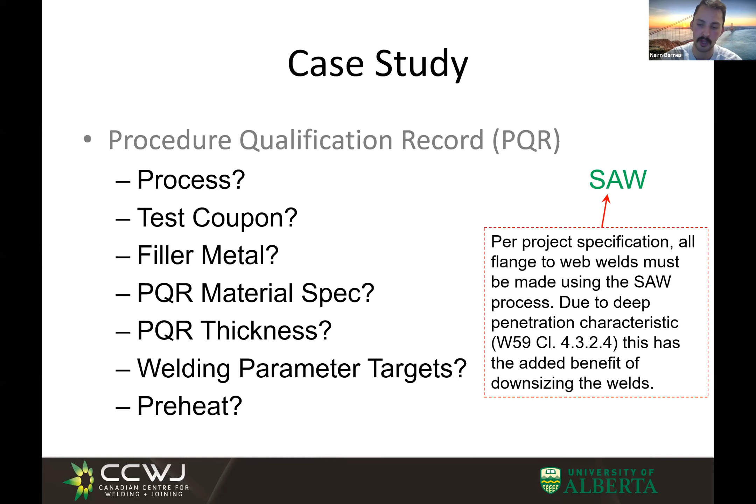So sub-arc is not only ideal because it's efficient, but it also gets this benefit - if you have a 10 millimeter weld called out on a drawing, you can actually do that in one pass because you can downsize it by that 2 millimeters extra to an 8 mil weld. So sub-arc is the process we're going to use here, and that's pretty much universal for all bridge girders.

So the test coupon, we're going to look within the specification and say we want to have this notch tested. Can we use a test coupon that's a fillet weld? No, because if you took a fillet weld and tried to put that in a Charpy, it just wouldn't work. You need a rectangular prism shaped sample, so you need to extract that from a CJP weld, or complete joint penetration weld. Sometimes you can do it from PJPs, but you want to extract it from a full penetration weld.

So you're going to create a groove weld with backing, and those requirements are listed for what that plate looks like within the code. So we go to the appropriate drawing and say, okay, we want to do some CVN testing for our project. And it's going to tell us exactly what the plate dimensions need to be, where all of those samples are going to be extracted, everything like that.

What they say in there is interesting to point out - they'll say you need to do a minimum 300 millimeter plate, so a minimum of a 1 foot plate in length, and then the dimension is given on the side as well.

But it's in your best interest when doing procedure qualifications, independent of code, to do a slightly longer plate. The reason is if you fail one of the tests within the plate dimensions you've done, certain codes won't allow this, but certain structural Canadian codes will allow you to retest outside of that. They won't allow infinite retests, but they will allow one retest outside of that. So if you build your plate to say 400 millimeters in length and you fail one set of your CVN samples in here...

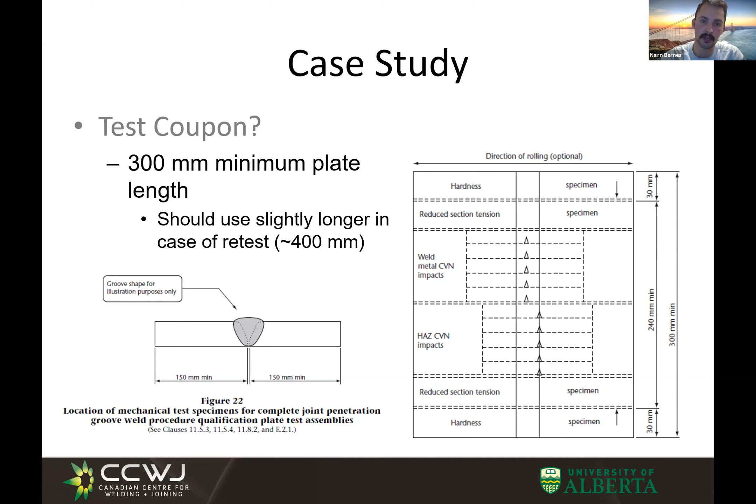So we have our test coupon essentially defined now - we know what our plate looks like. So now we're going to choose our filler metal to match our base material here. Our base material, like I mentioned, is a weathering steel.

So what are weathering steels used for? Bridges. And if you remember back from that first picture I showed you - and I'll try to zoom up here - you see that all of these bridge girders look like they're rusted. The reality is they are. Now, they wouldn't call it rust, they would call it a patina, which is just a fancy word for rust.

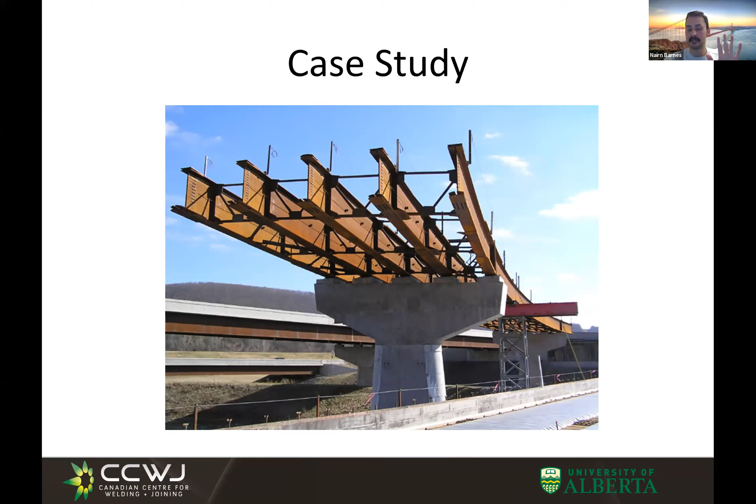But essentially, atmospheric steels are nickel containing, and what that allows them to do is build up a sort of limited scale level of rust that's predictable. So they know that when this steel is left outside, and as long as it's subject to consistent atmospheric conditions - not just somebody standing there with a hose spraying it, which does happen - you can predict what the thickness of that patina layer will be, and it won't corrode or rust past that point.

So when we're welding a nickel containing or atmospheric steel, we need to make sure that we are using a nickel containing wire. Otherwise, you're going to have these nice shiny welds that are going to completely fail because they aren't going to be able to keep up with the rust or corrosion rate of the rest of the steel around them.

If you look at the actual code, it will tell you that you only need to meet a certain strength, which is in KSI, because again, we like to bounce between the two units. But essentially, you only need to meet a certain standard for the actual strength of the wire.

But because it's nickel containing and there's limited amounts of products out there in the market, we're actually going to go up one level. So we're not going to match the base material and strength, we're actually going to overmatch the base material and strength. This is allowable, and those limits of allowability are defined within the code. But the main thing to take away is that we're going to match our filler material, with that nickel containing being the highest priority, to the nickel containing base material.

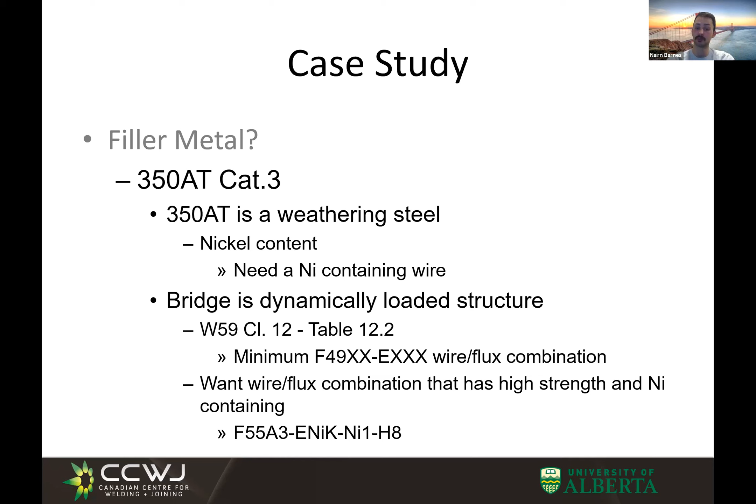One of the things I wanted to highlight, because this is important when you talk about submerged arc welding, is that we're going to look at the essential variables here. So when we use this wire and flux combination, we choose to use a neutral flux. I'm sure you guys have talked about neutral versus active fluxes when you talked about subarc welding. But really what we want to do is have the wire doing the alloying and not our flux, because active fluxes can have very good effects in welds, but they can also have some fairly negative effects.

More importantly, if we look at the essential variable table for W47.1, what we'll see is that with submerged arc, if we'd like to use any other size of electrode diameter other than the one used for the test, and we use an active flux, we can no longer change that wire size freely. But if you use a neutral flux, you can now change that size of wire freely without having to redo the testing, which is an awesome thing.

So essentially, if I test it with a 3.2 millimeter wire, and then in 2 months I do a project where now I want to use a 4 millimeter wire, I can make that change without having to requalify my procedure. Whereas if I used an active flux, I would have to redo the entire qualification. So it's again that idea of future proofing by being familiar with the code.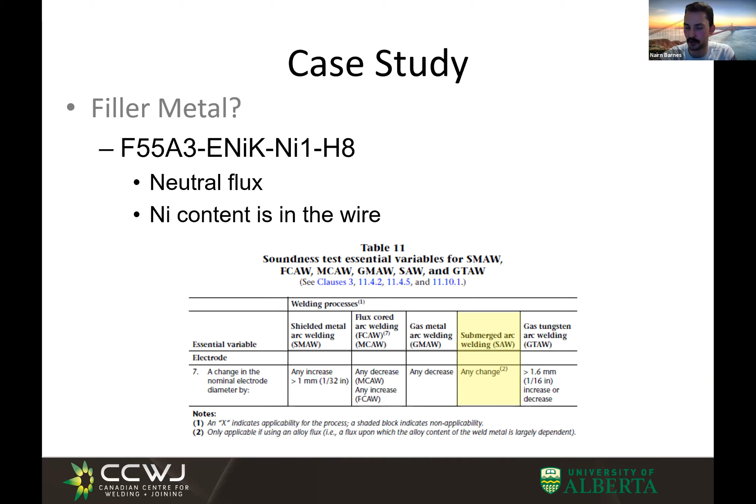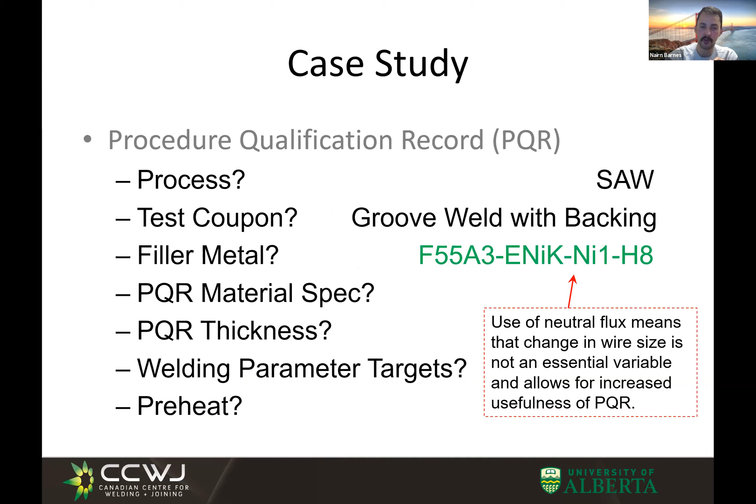So we have our process selected, essentially our sample. We know what it has to be. We've selected our wire and our flux combination. The material, this is again one of those things of future proofing, where we're going to select our material.

We know that based on this category 3, within the Canadian Welding Code, it's defined what that value actually is. Category 3 material needs to meet a CVN requirement of 27 joules, and the sample is going to be tested at minus 30 degrees C. So the sample is brought down to minus 30 degrees C, and then hit, and they measure that, and it needs to be at least 27 joules.

But again, to future-proof, and this is a recent change in the code, and thankfully they've listened. It took a long time of talking and convincing people, but essentially it used to be the case that if you tested at category 3, your weld was good for category 3 only. So essentially, if you went up 10 degrees and you were now welding at minus 20, you had a requirement for minus 20, and that welding you did at minus 30 was no longer good, which makes no logical sense, because going up 10 degrees is not going to lose you impact energy.

So one of the things that we do within our company is we very often have requirements to go between Cat 3 and Cat 4. Cat 4 is actually an even more intense requirement, so it's minus 45 degrees C.

Essentially what we do is we test our welds to category 4, so we test them at minus 45. And by passing minus 45, they made a recent change to the code that allows you to now be good at every temperature range above that, to the rest of the categories, right? So essentially back up to ambient room temperature.

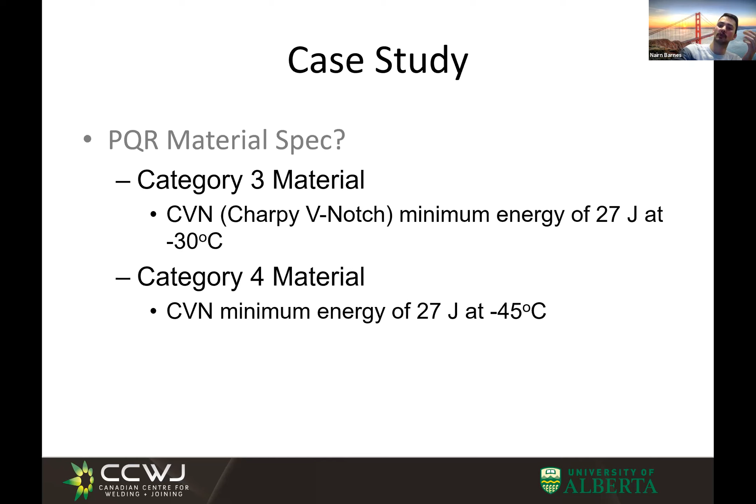You can reach out and contact them. They won't be happy to hear from you, but you can reach out and contact these people that run the codes to inform them if something doesn't make sense. And if they hear it from enough people, they will make the changes that are required. So it's something to highlight and notice those things throughout codes and standards.

So we've selected our material spec for our plates here. We want to test the Cat 4, so that gives us Cat 4, Cat 3, Cat 2, and Cat 1. All of those will be garnered by doing this testing. Now we're going to choose the thickness of our plate.

The thicknesses are defined based on the clauses within the code, and I'm not going to go into grave detail here, but just know that it builds in that future proofing. Essentially, by being smart about what sizes of plates you use, you can allow yourself to not have issues with what range of thickness you're actually qualified for. So I won't go into the detail of why it's done or how it's done. It's all written in the code, and I'm showing it here.

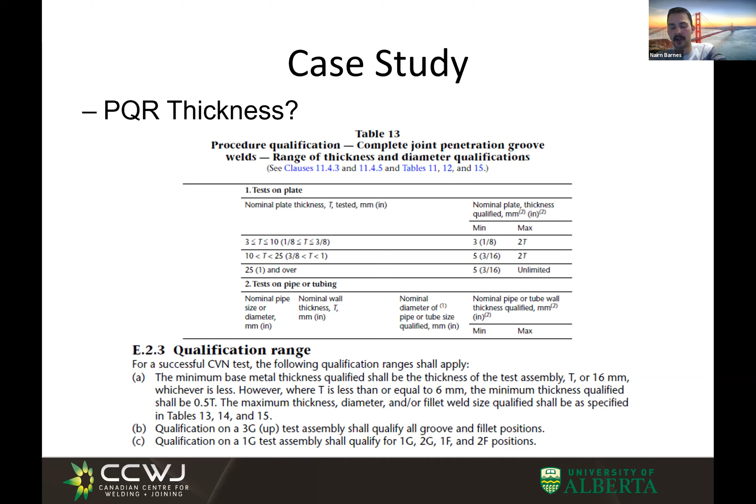But essentially, if we do the test on an 8mm plate and a 25mm plate, both meeting the requirements of this test coupon, the plate that we saw the figure of, if we do it on both of those thicknesses, the 8mm being done in one single pass, well, now we get our welding procedure qualified from 8mm to unlimited thickness. That means we can weld a fillet weld on a plate that is 8mm thick to a plate that is 400mm thick, and we can use the same welding procedure. It's irregardless, just by doing this qualification. So that's a very, very useful thing to understand and use.

Now, they're also building this under the understanding that nobody is going to want to apply this to a weld that's that thick. Even when we weld plates that are 100mm thick, people get super uncomfortable because it's very, very difficult to weld at those thicknesses. But it's just to know that you have that power available to you. By being smart about what you're testing with and looking and reading those clauses carefully, you can build in a very, very wide range of applicability after the fact.

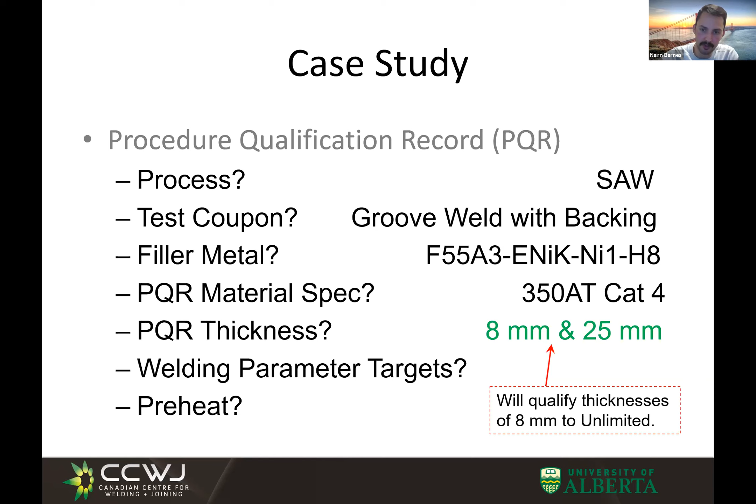The next one up is welding parameters. So what are we aiming for with welding parameters? Well, that's going to be dependent on our PQR. So when we actually hand this off to the shop guys and we call on the CWB rep to come witness it, and I go down to the shop floor to witness this testing, whatever the parameters that take place within that test are going to be what is reflected on the weld procedure.

But what that means is that when you're welding, talk to your welders. And this is true of any code, any standard, any industry. Talk to your welders and work with your welders. They are very intelligent people and they know their job very, very well. What you need to do is work with them and get an understanding based on them. As much as you guys might get out of this course and have good welding knowledge, you are not going to be an expert unless you are trained as a welder. So you should work with the people that know what they're doing and find out what works for that process.

And if you want to build in a larger range of applicability, you would do that in the PQR. A good example is this particular PQR where we were welding an 8mm weld, and we have to do that in one pass to meet the requirements of the plates. Then we're welding a 25mm plate, where we're doing a CJP weld there as well. In the 25mm plate, we're doing lots and lots of passes. So this is a good opportunity to build in the lower end of our parameter range.

So we're going to build in our lower range by welding at lower heat inputs, going a little bit faster, really building in the efficiency into the process. And then on the 8mm weld, where we have to make this in one pass, we're going to go super hot. So long as both these plates pass the test at the end of the PQR, at the end of the day we're going to have this very wide parameter range that should all meet and give the welders that flexibility.

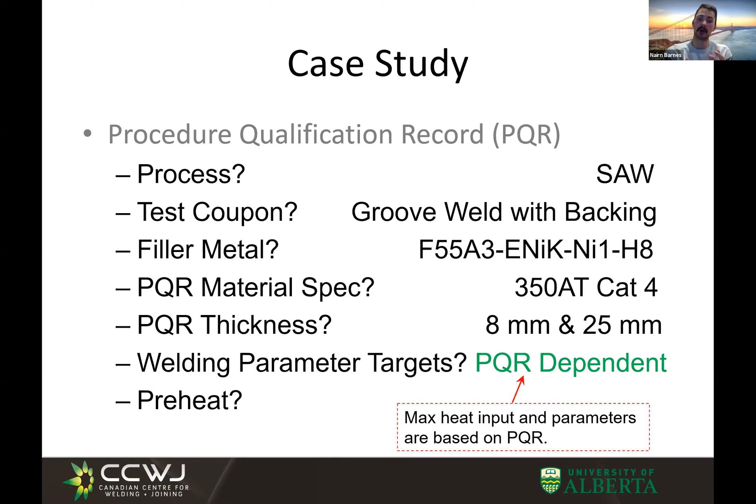One of the biggest complaints I heard when I first started in my job was talking to welders on the shop floor and them saying, this weld procedure is useless. And I would say, why is it useless? And the guy's like, well, we can't meet the parameters, it's physically impossible. A lot of the times you have to make sure that your parameters are going to work for them. So use the PQR as a tool as you're doing that.

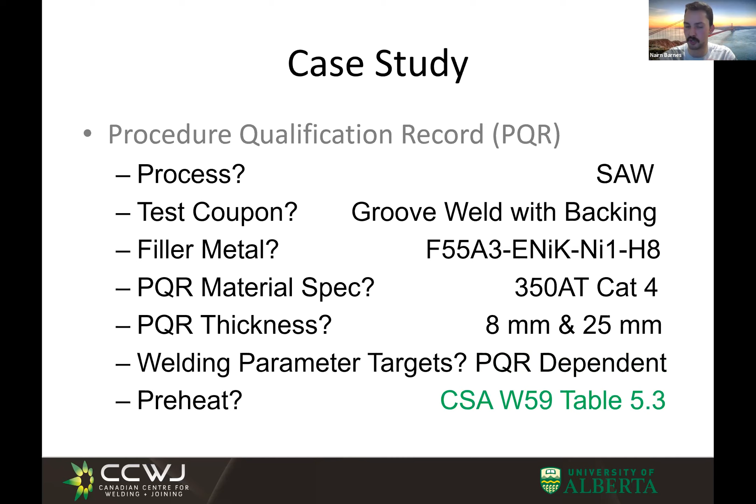And then the last thing here is the preheat, which is clearly defined within the code. Essentially, you look to this table, it says you have these thicknesses of materials, and you need to preheat to 20 degrees C or whatever it be for your material and your thicknesses.

So at the end of the day, we're going to create these two plates. We're going to essentially need to have the CWB rep there to visually witness the testing and record all the parameters because they don't trust you to do it. And then you're going to take those samples, cut them up, and send them off to the lab, get the CVN testing done.

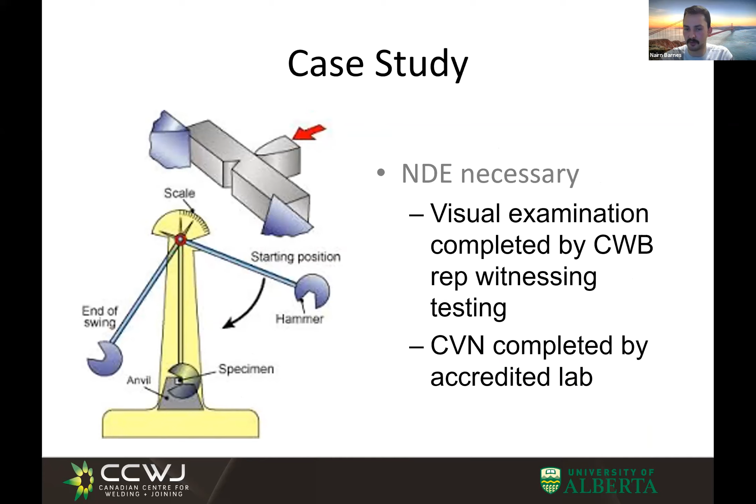And at the end of the day, you'll have your completed welding procedure that is good for the following things listed here. The biggest thing I want to highlight, I put in a new requirement that's been added in. I didn't want to build it into the actual case study here because I think it just adds confusion, but just for completeness and accuracy, I wanted to build in that new requirement.

But really the big thing I want to highlight out of this case study is when you build your weld procedures and you're going through this PQR process, use the code to your advantage. Build in the flexibility that you need moving forward. Like I said, one welding procedure, one $8,000 cost. Yeah, we ate that $8,000 cost up front, but now moving forward onto future projects, we get to advertise that awesome welding procedure and use it to our competitive advantage to say, look, we can nail this 100% of the time because we put in the work properly to make a good, reusable welding procedure that gave us the flexibility we wanted down the line. The code can be an impediment in your job and a headache sometimes, but it is also a very powerful tool to help you out when you're building welding procedures.

And that's true regardless of the field you're in. So the specific example I've given here today is specific to the structural field, but those lessons are true across all of the different industries.

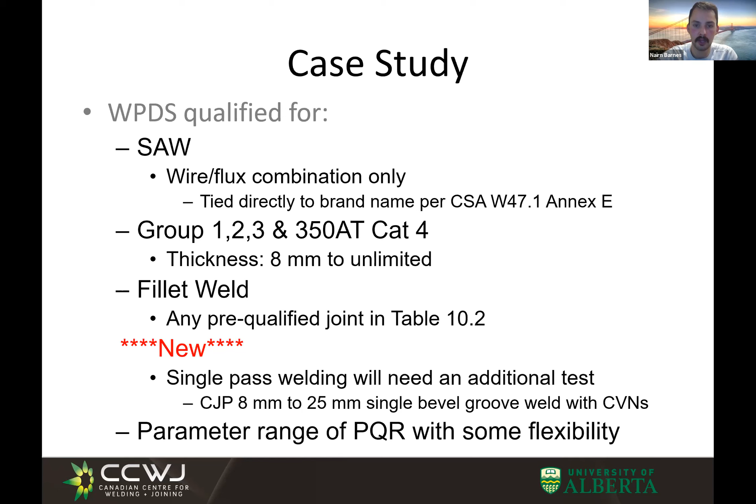And then the last thing I want to touch on here before I show you the actual welding procedure, we have just a couple minutes here, is I wanted to mention quickly the AWS structural codes. The reason I mention this is AWS, and I'm sure Eddie could attest to this if he's worked on some of these jobs, is AWS is a little bit like the Wild West. So as involved as the CWB is in the structural side for the Canadian market, AWS is just as uninvolved.

So for welder testing in Canada, for example, when you do a welder test, the welder has one chance to do it. If he fails, he has another chance to do it. Well, if he fails that, now he has to go back and do training and prove that maybe there's some things he needs to learn.

In the AWS, everything is self-administered. So that means I create the welding procedures, nobody reviews them, the client will review them, but they probably don't know what they're looking at. So all those things are self-administered, including welder testing. So if we certify welders all the time for AWS jobs, essentially the methodology is more or less: here's these 20 samples, I hope you can pass one of them.

Because that's all you need to do, you don't need to have any kind of repeatability, you just need to be able to pass one. One of these things I like to mention is that a lot of that accountability ends up on the plate of the people supervising - be it the certified welding inspector or the engineer signing off on the procedures. A lot of that accountability to make sure things are being carried out properly is on them, because there's no third party stepping in to say, wait a minute, this doesn't make sense. Specific owners might do that, but it's fairly rare, because not a lot of them understand the code well enough. So it's just one of those cautionary points for the American code that you need to be aware of.

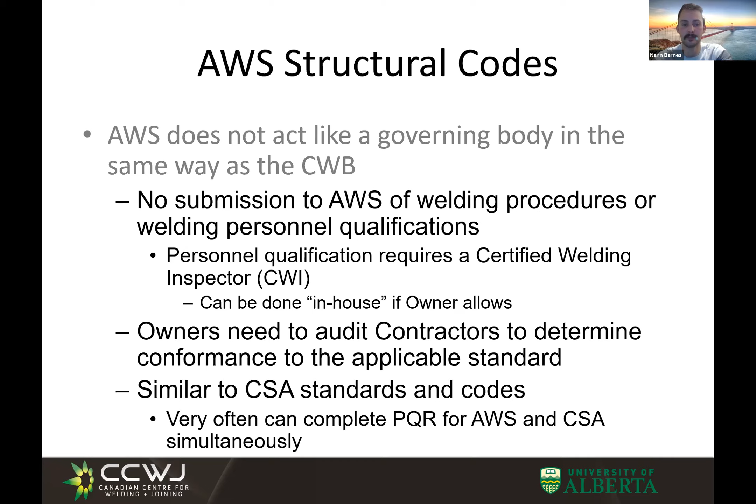So that's going to wrap up our presentation. I'm going to quickly jump out here and show the welding procedure of relevance. This is the welding procedure that we designed here, so you can see all the relevant things.

Nicely, in the Canadian and American systems you're required to show your welding parameters in SI units, and the American codes are also written in SI units. So it's very important to note that SI units is the universal thing, but people in general, when talking in industry, are going to very often talk in imperial units or a mix thereof. Try to get as familiar as you can - if you end up working in a field building welding procedures, try to get familiar and essentially bilingual in those two systems, because otherwise you're going to get burnt at some point by somebody mentioning something and it gets confused. You need to make sure you're very clear about what things are listed in, particularly heat input, because the difference between kilojoules per inch and kilojoules per millimeter is quite large - you're talking in the 40s versus in the 1, 2, 3 kind of range.